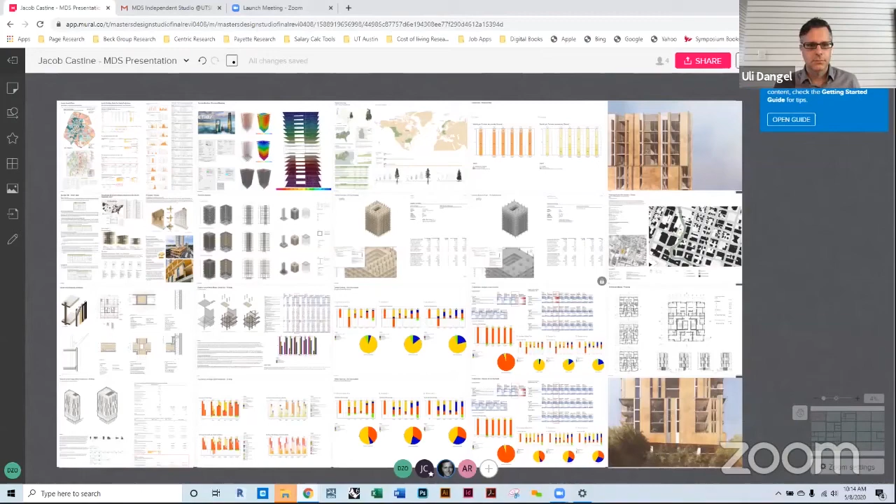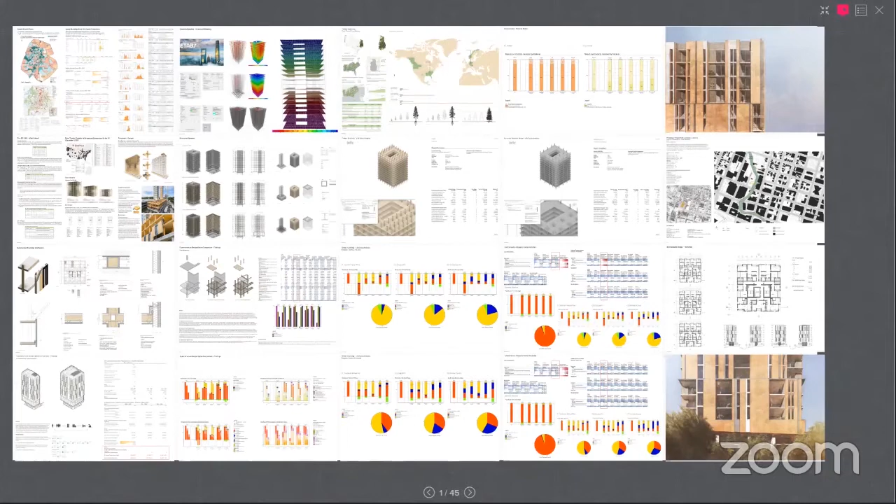I began to become interested in what are the potentials for this resource or this building system in the Southeast United States, obviously with southern yellow pine being abundant, with different physical qualities than other species of tree, but with a long history of light wood framing and other infrastructure uses in the United States. I decided to start to consider the possibilities for mass timber in Texas.

So I will start here. I began looking at Austin's growth plans, looking at population projections provided from the Austin Chamber of Commerce, using census data from the last decade, and then their projections through 2030, 2040, and 2050 for the city's growth.

It kind of goes without saying that Austin has urbanized quite rapidly in the last 20 years. So I started looking at Imagine Austin comprehensive planning for the city, starting to think about where are these nodes or centers that could start to produce more urban environments in the coming decades.

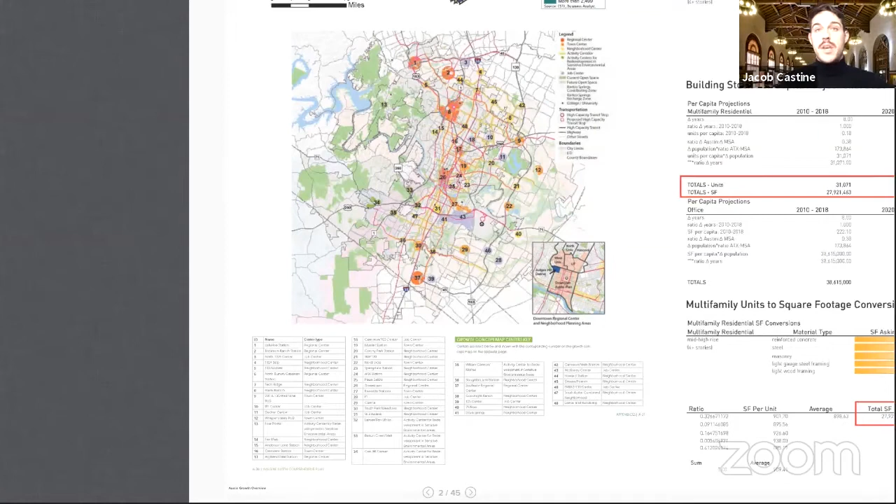Here is where I began with looking at these projections of population growth, and was able to get in touch with the right people at the McCombs School of Business here at UT to work through CoStar as a real estate development data source, and relate this trend over the last 10 years of population growth in Austin to some of its mid and high rise structures, breaking them down by building superstructure.

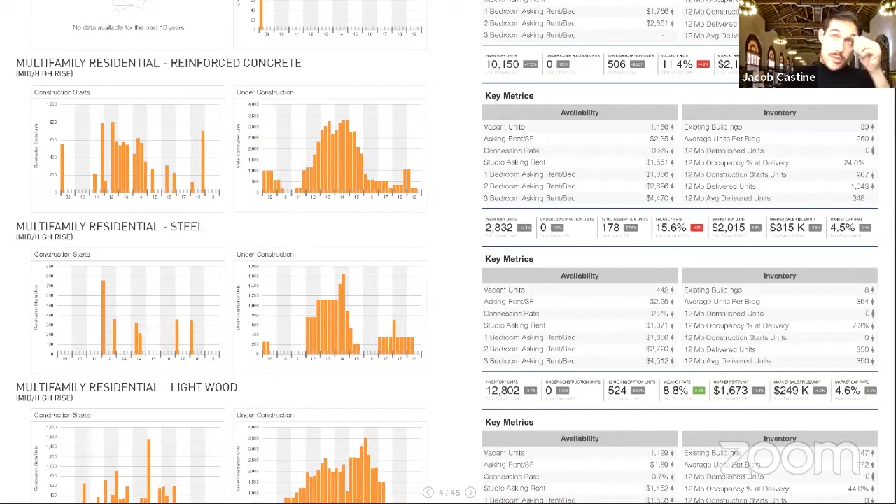So I was actually able to get a report. We were able to generate a report of inventory units for multifamily residential and square footage for office buildings being built over the same time period as the growth measured by the census data in Austin.

So what this started to set up was building stock per capita projections, not necessarily in a literal one-to-one ratio where everyone who moves to the city moves to a mid or high rise building to live or work, but to establish a relationship between the growth of the city overall and the growth of its corresponding mid and high rise architecture as well.

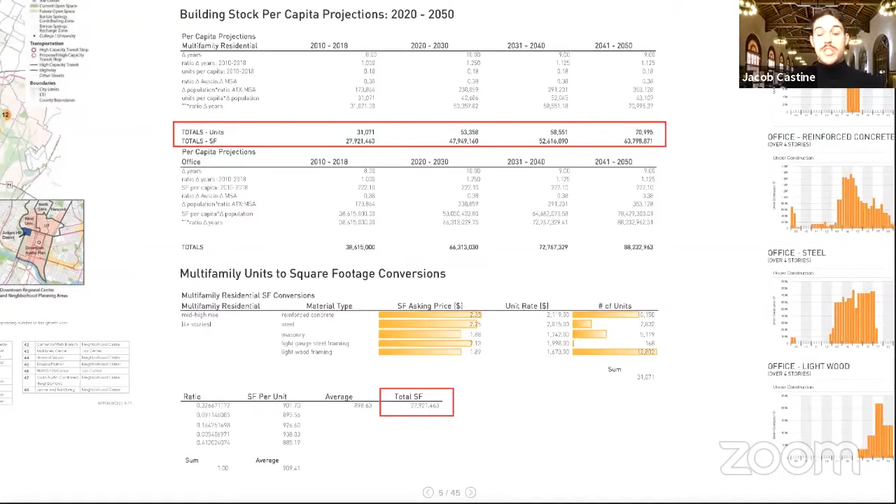So I decided from there to look at multifamily residential as a building typology and move forward with the research on that basis. From there, obviously the 2021 IBC is something a lot of people are very interested in right now, with some of their type 4 construction breaking down heavy timber into A, B, and C, and considering various heights that are new to the United States out of the material.

So from there, I started looking at precedents, and for me the overwhelming driving precedent for considering the potential to achieve competitive floor-to-floor heights and leasable square footage in a mass timber high-rise was something comparable to a reinforced concrete frame.

I started looking at the Brock Commons Tall Wood House at the University of British Columbia, their student housing building, which, for those who don't know, is the tallest mass timber building in North America.

I'll also relate this back to looking at the real estate metrics with CoStar—it was overwhelming that for multifamily residential high rises in Austin, reinforced concrete frames are what we've built with historically.

So that established a sort of baseline comparison in terms of looking forward to life cycle analysis and a competing market.

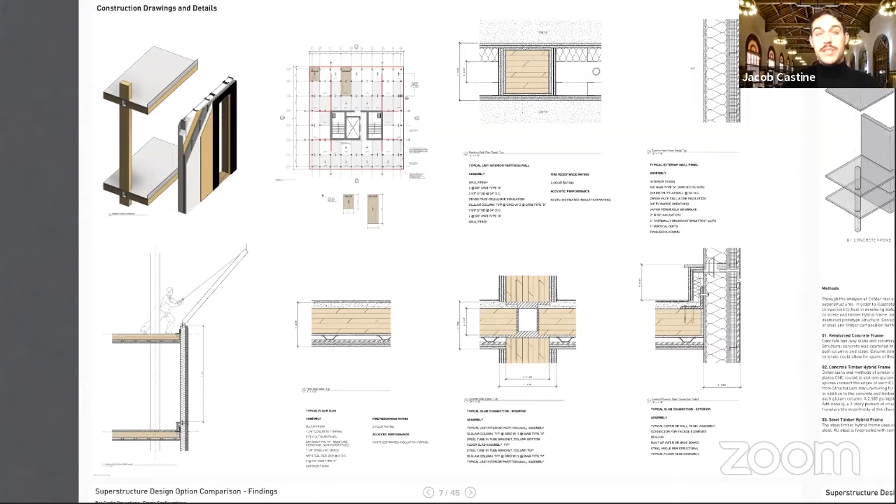So here I'll actually drive in for a minute and zoom in. I started with establishing what set itself up as a pretty efficient use—as best I could get efficient use—of the CLT bays for a prototype floor plate system out of the two-way flat plate slabs and the glulam.

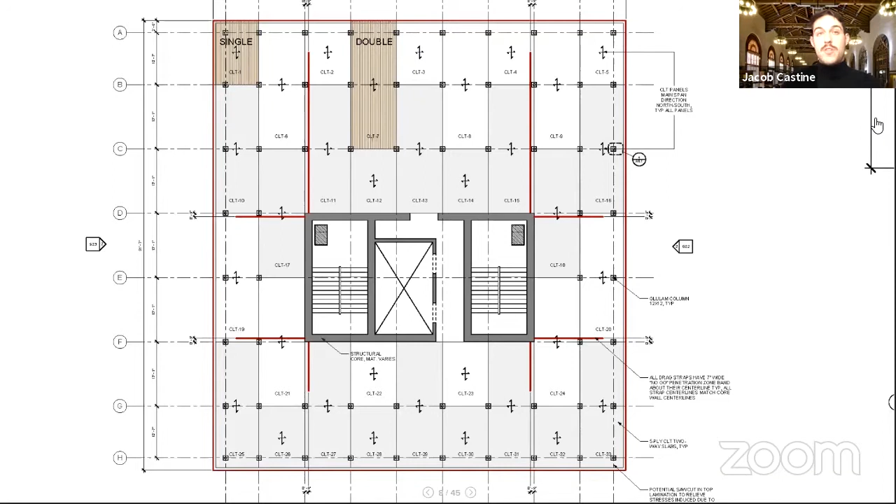So I started with this framing plan to work out a building mass using Structurlam as a resource to maximize the spans for the CLT. And then from here, considering the same or similar panel system as Brock Commons to clad the building overall.

And then these are just a few of those connections and some of the systems that started to set up what the prototype building could look like.

So in order to determine that, I was comparing this to a relatively, at least arguably close, concrete baseline model.

Uli actually was able to put me in touch with an engineer that had worked for Fast + Epp during Brock Commons, and since works for Intuitive Engineering in New York, a structural engineer who is professional with a history in both concrete and mass timber structures.

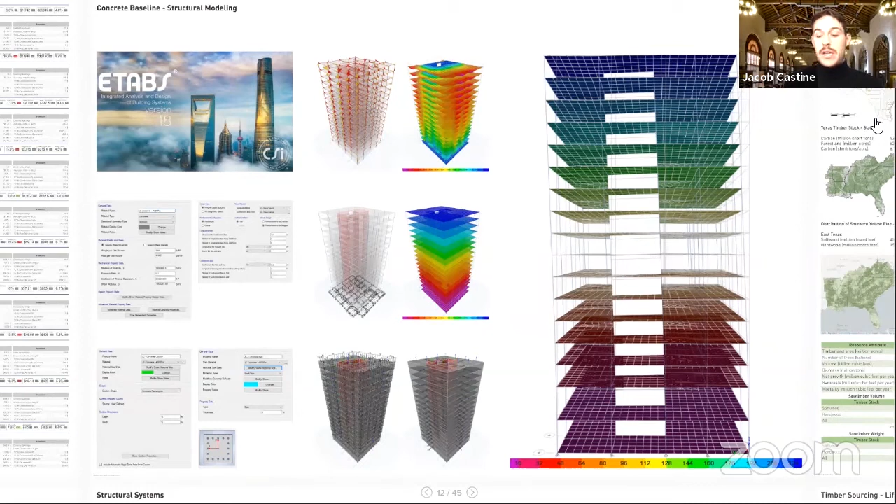So working with her as a consultant, and some professors from the School of Engineering, as well as another master's student consultant, I was able to work through an ETABS structural model defining what a relatively accurate quantity of concrete would be for a baseline prototype comparison.

This set up 3 design options for a frame prototype: one being the concrete frame, the next being a concrete timber hybrid frame, like we see with the Brock Commons Tallwood House, and a third option being a steel timber hybrid frame.

This third option came out of a discussion with Tanya Luthi, the engineer formerly from Fast + Epp and now at Intuitive. She mentioned that had the project timeline been something that could be accommodated a little better, through further testing, a steel timber hybrid frame could have been explored.

A steel timber hybrid frame, with steel as the core, the podium and the core, is something that could have been done at 18 stories. And she felt that, especially in this seismic zone, it was something that was achievable.

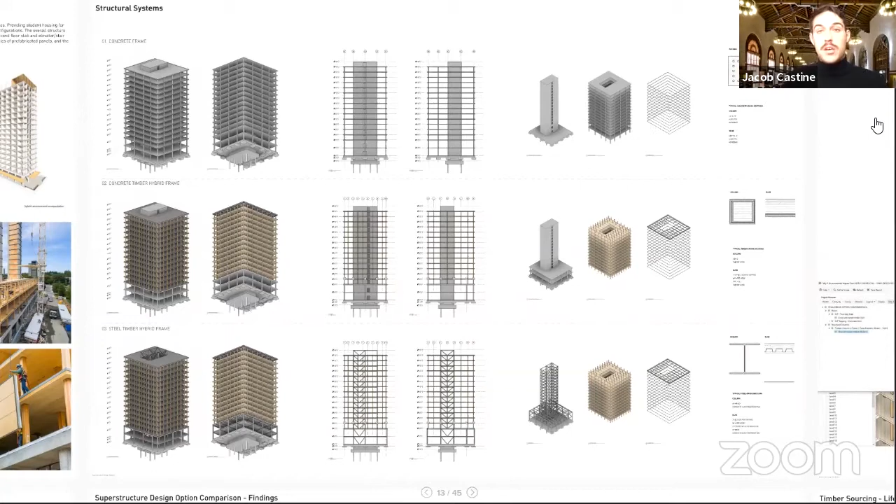So I thought that could be a really interesting third comparison. This setup, basically, we see down at the bottom of these models, you can see my mouse, taller floor to floor heights.

This established a sense of a podium for a prototype building, trying to be reasonable and accommodating something that could actually exist within an urban fabric and work with the streetscape, to have retail and a lobby and potentially amenities as a gasket deck, before then turning above to tighter floor to floor heights for the residential units.

I should note, for the life cycle analysis, there was no foundation assumed for any of this. Everything just started with columns at grade, working from there.

And then here I just have some general cross sections of some of what was tested both in ETABS and in the life cycle analysis. Here's just the timber concrete frame version of that.

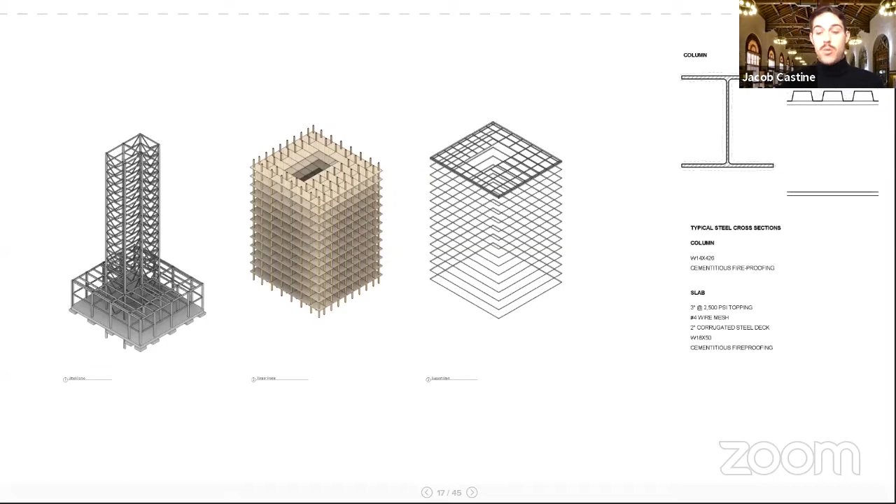3 layers of 5/8 gypsum wallboard and concrete topping were also accounted for in the life cycle analysis for both timber frames, and then the steel structure with cementitious fireproofing and corrugated decking for certain floors as well.

So these are just diagrams of what the three LCA models looked like. From there, I set up an analysis of the global warming potential for each of these systems. It was less about the actual numbers and more about establishing relationships.

I used KT Innovation's Tally, a software from Kieran Timberlake, and worked with their leading developer for the software at their office, as well as someone I was able to consult with from Lake|Flato Architects here in San Antonio, who use KT Innovation Tally as a Revit plugin for the Soto project, that mid-rise office project I mentioned earlier.

So really, for this, it was to establish these relationships between the three structures. A lot of things were considered, in terms of drag straps and channel steel to connect the CLT flat plate system back to the lateral core.

All of these things were taken into account when looking at the life cycle analysis and material comparison. I wanted to be as detailed as I could with the time that I had, to really work with a comparison I felt comfortable was somewhat of an accurate representation, and biogenic carbon for these studies was included.

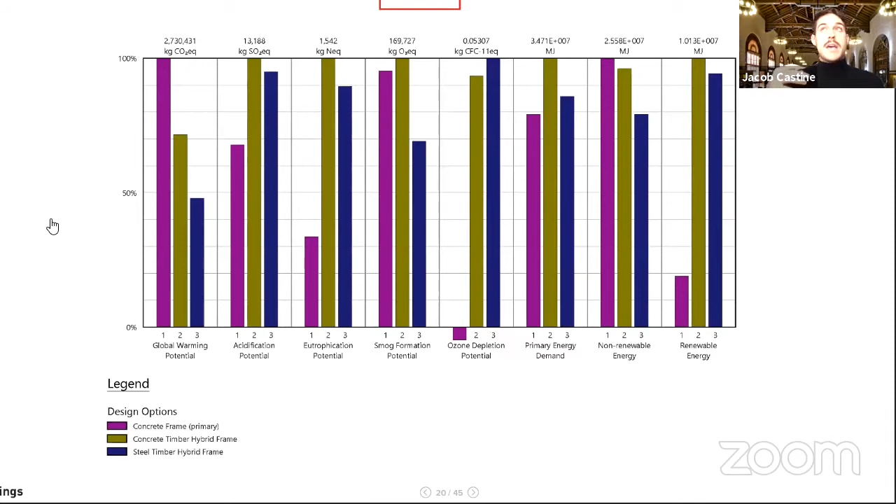So not just looking at the carbon sequestered in the frame, but using that as a gross to net reduction from the overall impact of the two timber frames, taking that sequestration number into account to look at what the final impacts were for each structure.

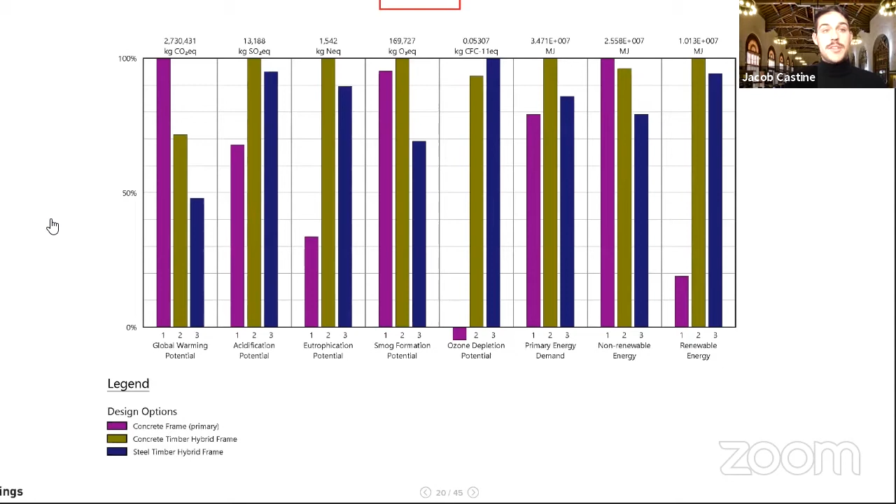So we can see essentially the concrete timber hybrid was about 75% impact, a little less than the pure concrete frame, and the steel timber hybrid was about 50% the impact.

So, these started to set up a bunch of other comparisons that I thought were pertinent to the study. Looking at all of these options, we see the product itself being an overwhelming number in the data, also end of life really driving some of these relationships. This is just a look at some of the material.

One of the things I actually learned from this that I thought was pretty interesting was just including the finish—the Type X gypsum for the two timber models—was actually a pretty significant amount of impact in the overall assessment, though still much better than the reinforced frame impact.

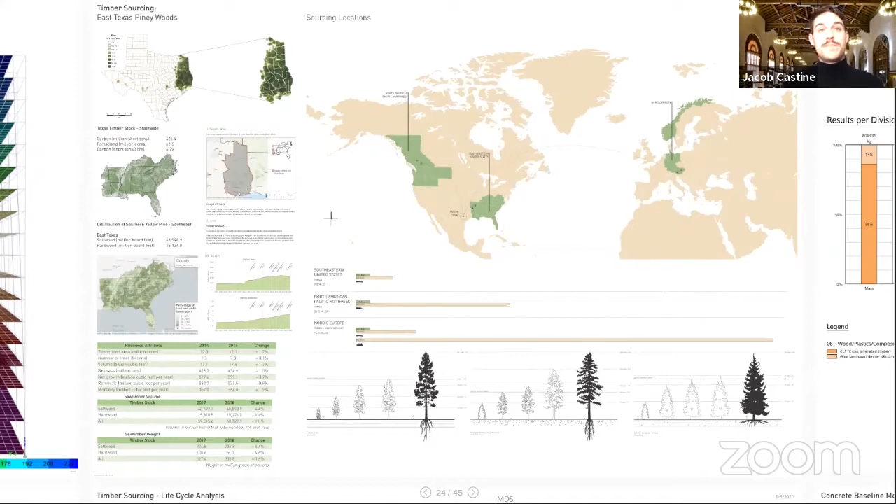So from here I started thinking about, if you were to use this material, how could you source it locally, or at least regionally, for the Southeastern US, versus considering the Pacific Northwest, or not as much of a relationship to North America with Nordic Europe. But looking at other countries starting to bring CLT into architecture and construction methods, sourcing from somewhere that includes container ship, etc., I thought could be an interesting layer to comparing sourcing options for the timber itself.

So down at the bottom of this screen right now, I've got the Southeastern United States versus the Northwest versus Nordic Europe. And I worked through some logistics tracking CLT, or all timber products, from Austria moving through Antwerp, Belgium as a port, and then container shipping to Texas City, just outside of Houston, and then bringing that to the site in Austin.

So that set up a mileage that's a little bit more involved than just these graphs, but these illustrate the overall miles traveled for the material and then for the product, for both trucking and container ship.

So I started thinking about how this could play into the East Texas piney woods and the resource that we have right here in the state. Obviously, at mass scale, this has mass implications as an introduction to Austin or to Texas urbanism in general.

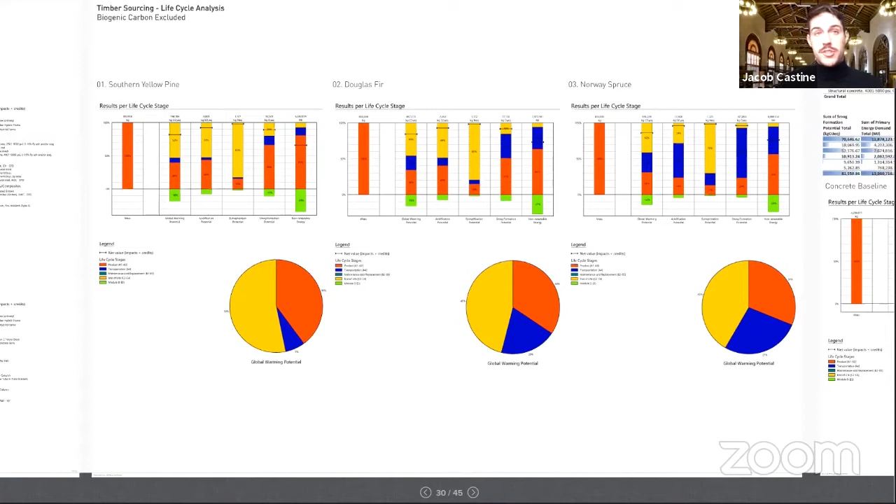So just starting to look and learn from some of these relationships. And now they're starting to bring into the conversation the use of, or the inclusion or exclusion of, biogenic carbon and how that changes some of the data.

So then this gets established against the concrete baseline, for the amount of concrete it would take to produce that same volume of building and same square footage. So everything kind of broke down to some later findings in including or excluding the biogenic carbon and relating that to the impact of the reinforced concrete frame.

You see here with southern yellow pine, I was actually netting negative on the sum of global warming potential total, versus barely netting positive for some of the other sourcing options, which was dramatically different than the reinforced concrete frame. But then excluding the biogenic carbon, I started to find numbers that were closer to half, or even greater, the impact of the reinforced concrete frame.

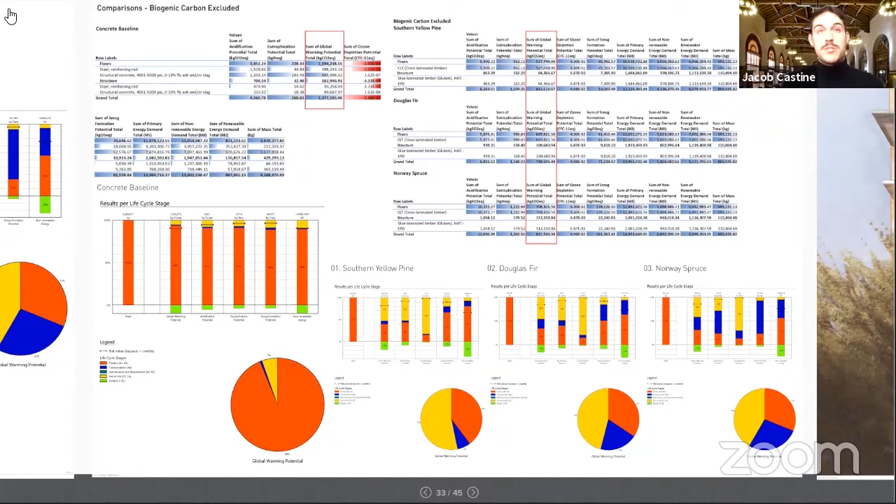So just a lot of discrepancies with that. So this turns into architecture at some point.

So I started working through some of the comments made by Tanya Luthi from Entuitive, about some of the difficulties they had working with this two-way flat plate system. Balconies are difficult, I could see why. Architectural form is difficult. You can kind of see that with the Brock Commons building.

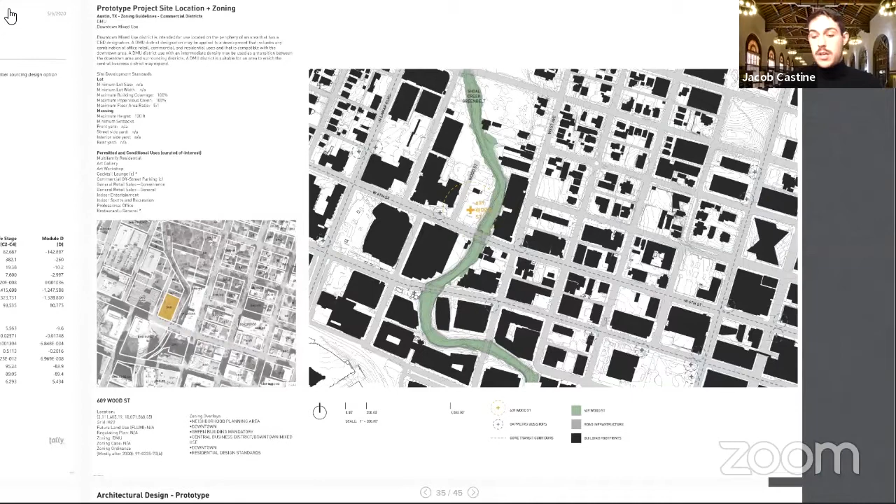It's very extruded, so I wanted to look at this in the context of downtown Austin and start to derive some architectural form that could hopefully produce some interesting architecture out of these systems, giving vibrant building design. This is an example layout of 7 units per floor plate of studio, 1 bedroom, and 2 bedroom capacity, breaking down the net to gross square footage. The efficiency of the floor plate is about 9/10, factoring in the core.

This starts to look at some overall massing for the building and its relation to the creek, and thinking about one specific design and how you could use these panel systems and the potential to inset some balconies, and try to accommodate the tight columns and establish a form that could hopefully be elegant and viable as an architectural solution to a downtown city skyline.

So for the sake of accentuating the podium, I sliced the massing down to the Shoal Creek Greenbelt that's found nearby, and similarly tipped the mass up top to allow for a nice overlook to the Capitol building and Judges Hill to the north, which is a very green, low part of the city. This rises the mass up on the south side of the building to cover chillers and rooftop equipment.

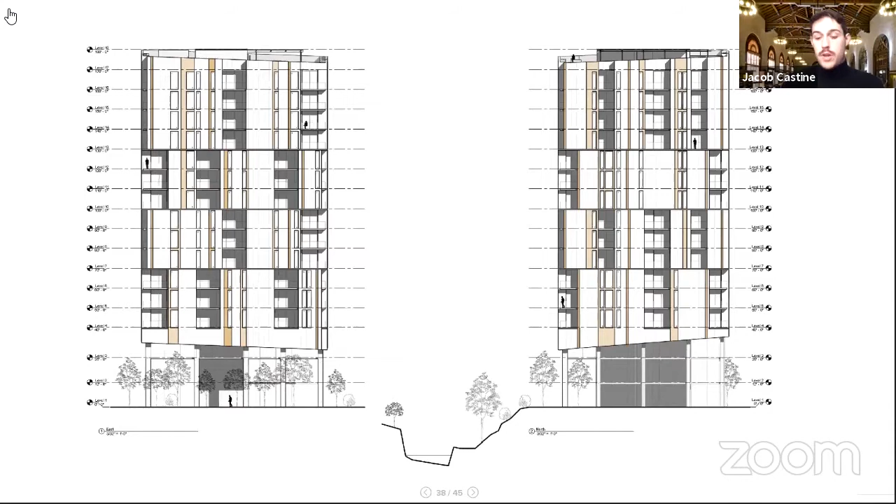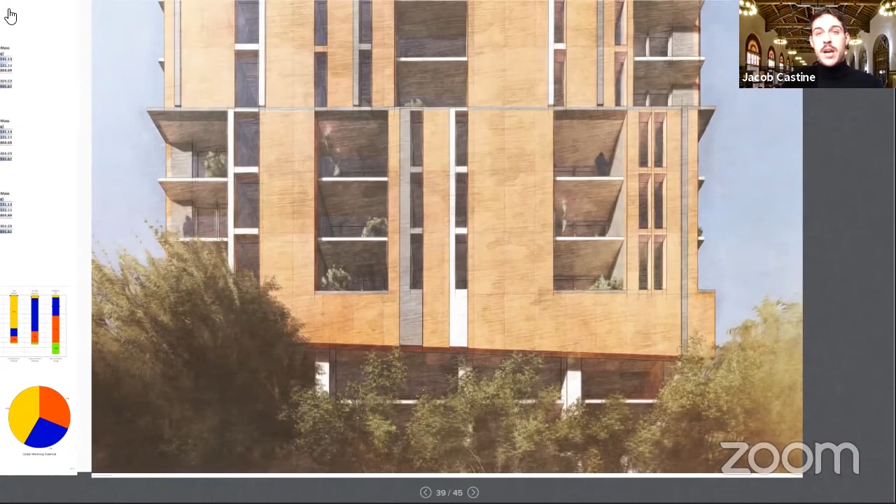So essentially you can work to create architecture out of a very rigid and simple system, to derive some form that could hopefully be more interesting and compelling in general for these projects. This is just a view looking back from that Shoal Creek Greenbelt.

So from here, some of the conclusions, at least so far with the research, fall similarly to a lot of the discussion that Alan and Andrew have in this timber topic for the industry right now. Looking at different modules, different design potentials for the building and how they affect metrics, I thought could be kind of a nice conclusion, at least so far. And I say so far because I'm still very interested in all of this, obviously.

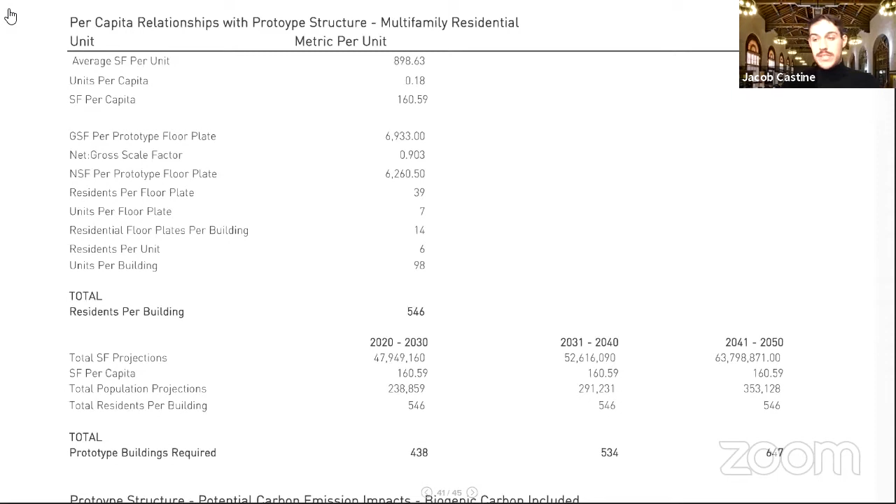Just to wrap up some of the study and look at relating the life cycle analysis metrics that I got through Tally back to the per capita relationships of the real estate data and the Austin population. So essentially some of the findings were that the steel timber hybrid frame performed about twice as efficiently in terms of global warming potential as the reinforced concrete frame, with the concrete timber falling somewhere between the two as an intermediate.

You start to see not the relationship of the sequestered carbon, but that being factored into a relationship of per capita projections in terms of multifamily square footage per person as the city grows, and how that works into tons of CO2 folding into the coming decades over time, and what the potential reduction implications could be, at least at full acceptance of the material. So 100% usage is as far as I was able to get with some of these comparisons.

So you end up with as much as 2.5 million tons of CO2 over the next few decades when looking at a steel timber hybrid frame versus some of these reinforced concrete frames. And then this just had some fun with thinking about what the actual implications of this are in terms of how many vehicles that's taken off the road annually, and some of these other relationships.

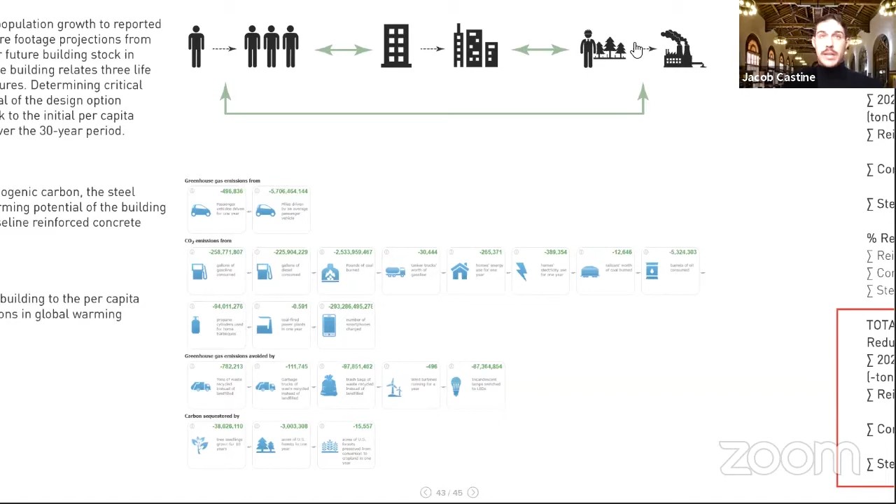This diagram at the top just illustrates the workflow of the project. As the population increases, it creates relationships to how building stock increases in terms of square footage, creating relationships to the materials we use to derive those buildings. And relating those buildings back to the population brings a full circle look at what these implications are, and what you get with some different options and different residential units packed into different massing.

As much as 1,000 to 1,500 tons of CO2 reduced per building.

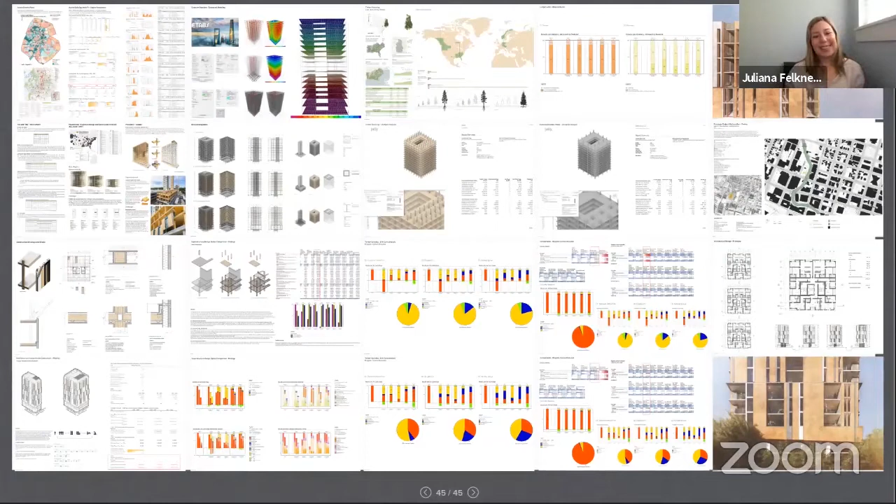Is there a way to let other people drive on the screen share or anything? Like if anyone wants to point, or I can tab through as necessary, just let me know. I don't know if they are—I think they're able to move it within their own mural, but yeah. Yeah, it doesn't seem like we can annotate. That's been something we've been able to do in the past, but I'm not seeing that well often. I did not set up this meeting, and probably that function was disabled. I can wave my hands a lot.

Okay, well, I'll jump in. First of all, Jacob, this is incredible work. It's deep, it's broad, it's nearly comprehensive. I have a couple of questions about it, choices you made methodologically.

But I just want to open by saying that this is the kind of work that architects, engineers, builders, the building sector in general should be doing—to evaluate their consumption habits, and also to feed back information, as Juliana said, back to behavior, right? Like how much consumption we as consumers, dwellers, are responsible for, and also the associated impacts of the building life cycle. So any comment I have from here on in that's a question or maybe a criticism is couched from a position of me being completely impressed by the work. I just want to make that clear from the outset.

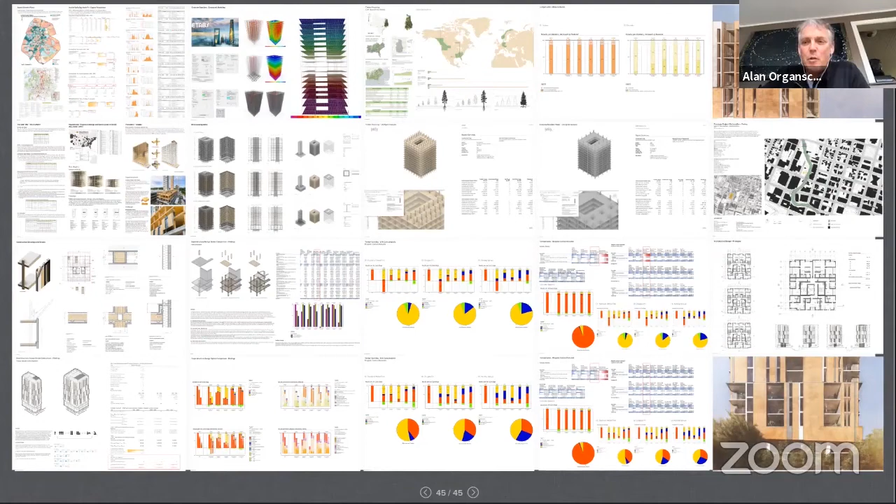Could you, or maybe working with Diego, be the people who really start criticizing this? I thought one of the most poignant things you pointed out was gypsum board, which has a huge carbon footprint and huge set of impacts. No one knows where the gypsum mines are, where this stuff is mined. We're completely disembodied, and even the code at 18 stories still requires coating our buildings with that stuff. You showed that impact, and I think that's really valuable. So what would be the substitution benefit in shifting to some kind of bio-based panel, of which there are many? They don't yet provide the fire protection, I admit that, so I understand the feasibility concern.

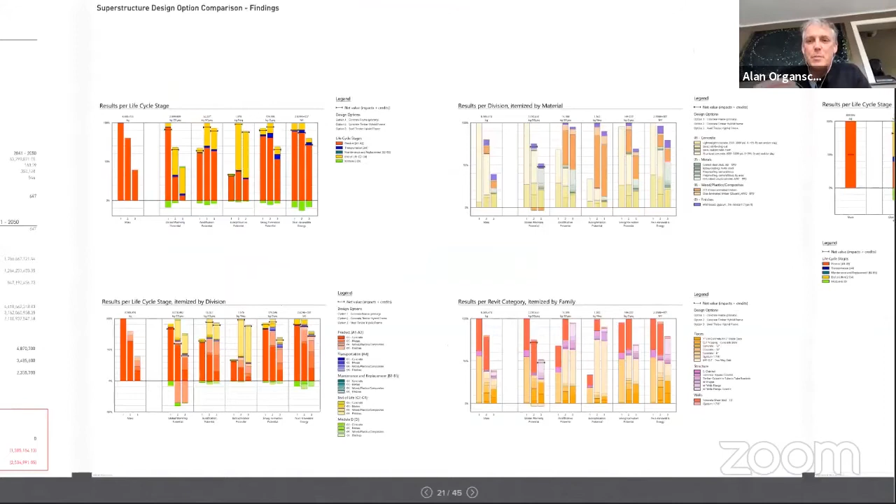But I guess for me, the thesis is something that not only does really hard, close research into existing conditions, but also proffers technical as well as design futures. I think what's implicit in the amazing work you've done - and I don't use these adjectives lightly, because I'm really impressed and look forward to poring over it in more detail - is that given the incredibly narrow window for climate action, and given the enormous share of responsibility we hold in the building sector for anthropogenic greenhouse gas emissions, this is something where we've got to move the ball forward fast. That's a generalized comment, and I should shut up.

But I think one more comparison would show us something radically different, and that might incentivize policy, development strategy, any number of wedges in the climate action field that could really start to move the dial.

Yeah, those are great comments, I really appreciate that. Just to speak quickly on that, without taking time from anyone else - my feeling is it's very well received, in that it's not a hindsight's 20/20 thing, but more of a 'where can I go from here' with some of the findings already. Thank you.

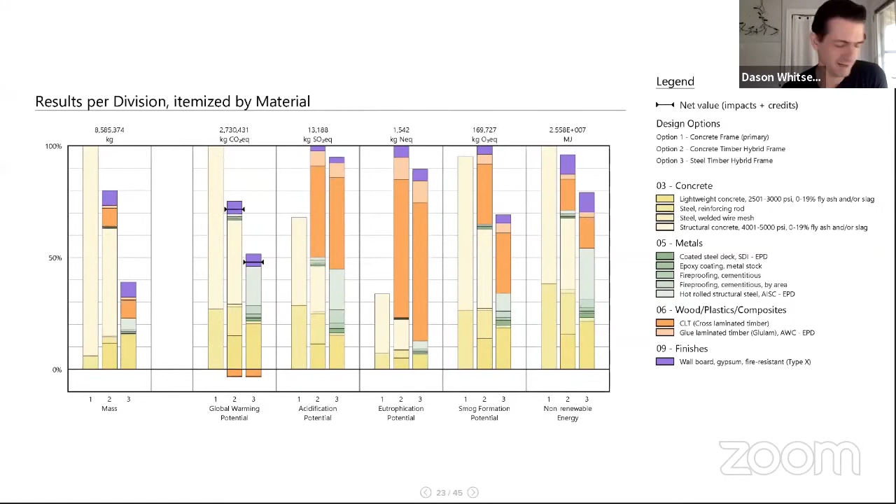Yeah, I've got a few comments as well. I would second everything Alan said about how fantastic your work is here, and really appreciate the depth of analysis and also the design sensibility applied to it, looking realistically at various construction implications and detailing. So it's all very impressive.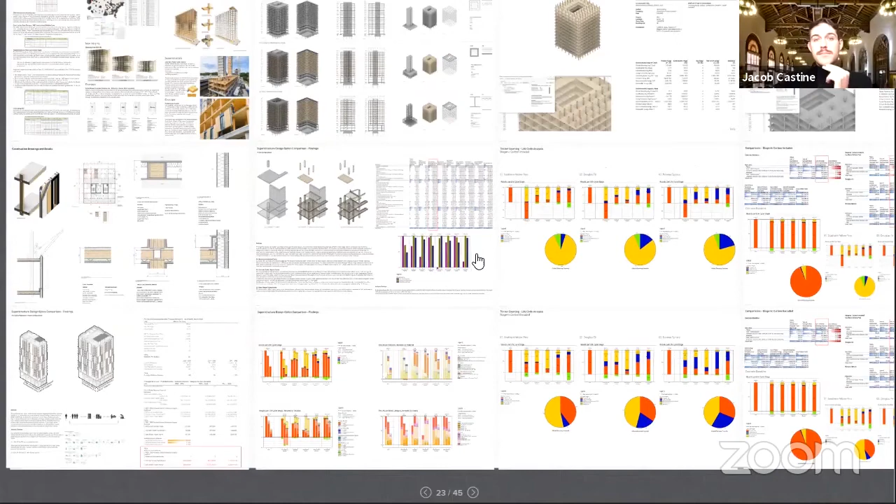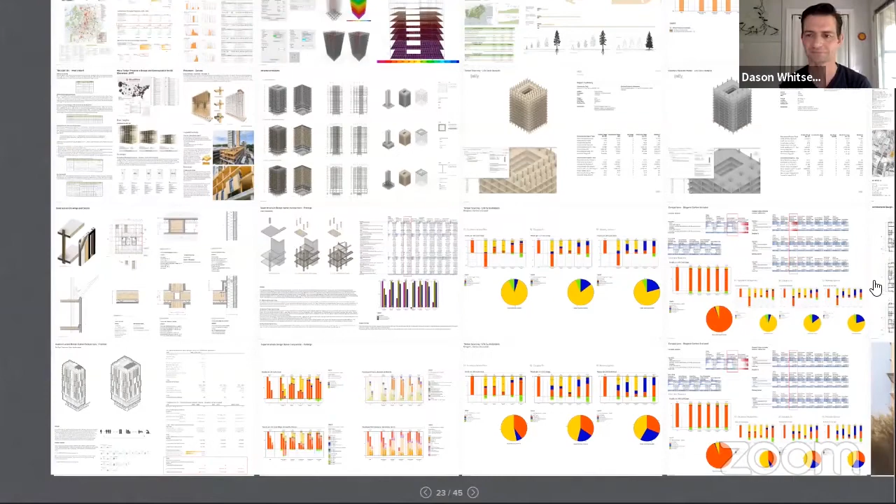I've got one minor technical question and then a broader one. My minor question: you mentioned briefly that the lowest carbon system was actually negative in its global warming potential, I believe under the Southern Yellow Pine scenario. Can you explain why that is, what was leading to it being negative? I think it's over there on the middle right of the view we're seeing right now, where there's some red in a rectangle. Yeah, here it is.

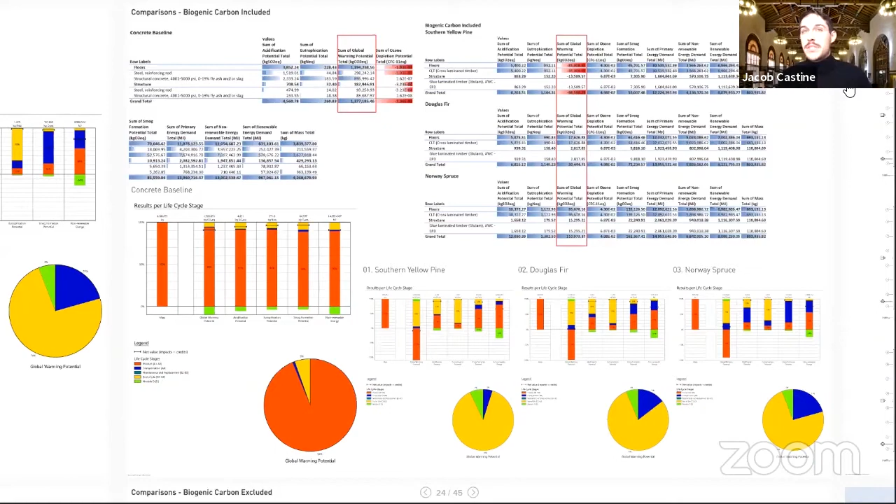Essentially, what is driving that number with biogenic carbon included to be negative is that the amount of carbon sequestered in the mass of the timber, and it being sourced so locally that transportation isn't overwhelmingly consuming the offset of the resource. It's holding more CO2 than the system - at least the tally is saying that option is sequestering more tons of CO2 than it is emitting through making the material.

Got it, okay, that makes sense. And that's just for the timber? Yeah, that makes sense. One general comment is, I think you didn't consider operational energy, am I correct about that? No, I did not, that's excluded from the study. Because doing the superstructure, the frames, I didn't have a full building I was looking at.

Sure, and the breadth of what you did look at is quite impressive, so I don't consider that a fault of your study. But if you expanded the system boundary to include operational energy, you'd probably see an additional improvement in terms of the carbon footprint - probably small given the size of the buildings, but a comparative envelope built out of CLT versus a concrete panel system or metal stud system for the walls would probably perform a bit better, although that's probably not the majority of the energy load. So that's another little tick in favor of this.

I guess my broad question is - I'm sorry, I have a question, sorry, this is Ray Zaferon from Civil Engineering. Are you stating that the mass timber building would have better performance in terms of energy efficiency during the use stage? Could you elaborate on that? Because from a civil engineering structure standpoint, when designing buildings such as masonry and concrete, the fact that these are heavy mass buildings means you tend to have less HVAC requirements, because you're able to use the thermal mass of the building to offset some of the energy.

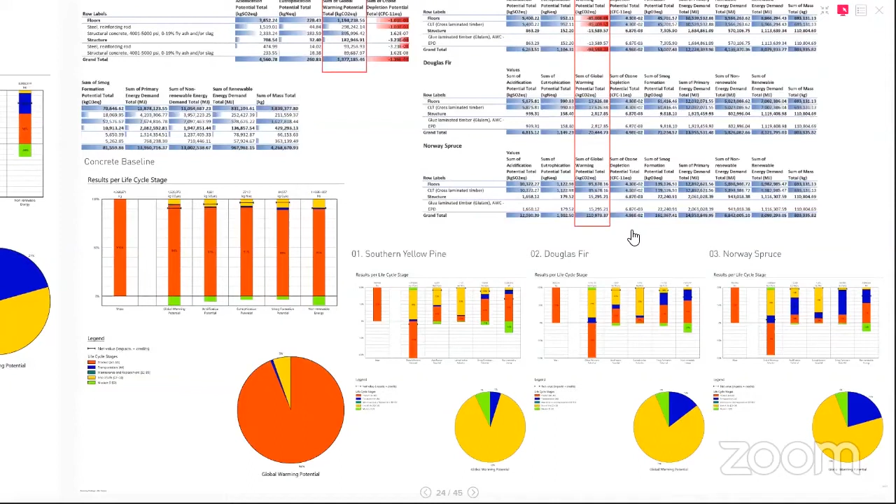I think that would be interesting to compare. In calculations, you can simply try to figure that out. But I also think there may be thermal bridges that come about from that cladding system, so more needs to be explored there.

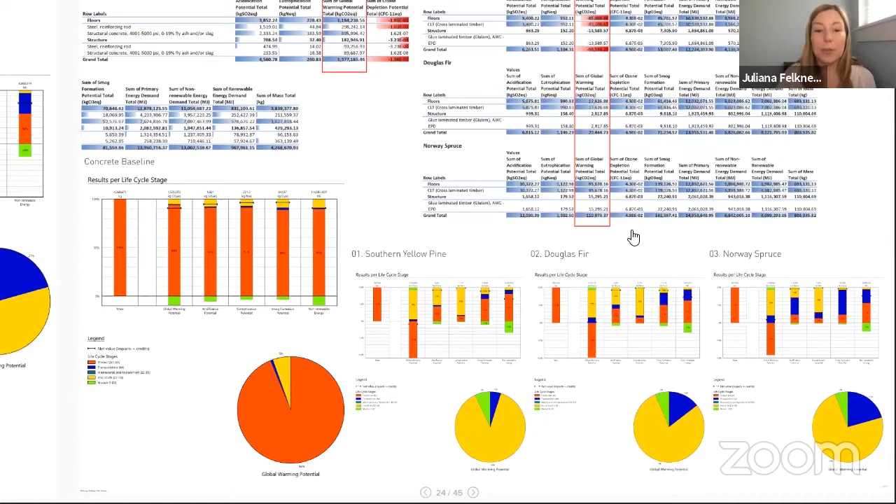Sure, yeah, absolutely. Jacob was very modest when he said he did not consider operational energy. While he didn't calculate it, he did consider it qualitatively in the design of his window wall ratio. For example, you can see he has very small windows in some of his units, and that was deliberate to reduce the solar heat gain because we are a cooling load dominated climate with hot summers and need for air conditioning most of the year. He also gave very generous balcony spaces to give a kind of buffer zone for each unit. So while he didn't calculate those geometric changes, I do think they help pull this material to its fullest potential.

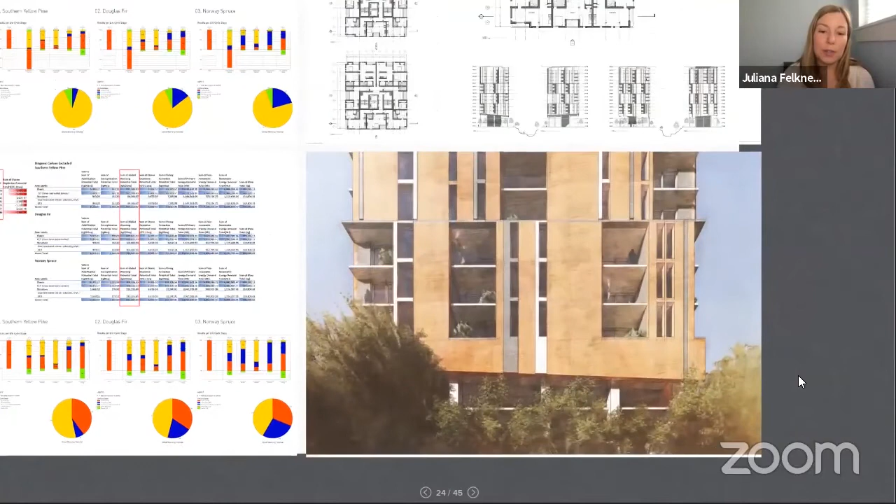Thank you, Juliana. I appreciate that point, because what I meant is that it was excluded from the quantitative studies we're talking about, and it was assumed that the superstructure of the building would be clad or finished in a similar system, regardless of what the frame itself was. So kind of excluding all of that from the life cycle analysis itself. But those things are taken into account when you start to look at the architecture, with the deep inset balconies and window to wall ratios on different faces, responding to the climate in that sense.

Yeah, and since Dason you raised the sort of life cycle issue of it, we should also be looking at the end of life scenarios as well. End of life scenarios for the steel and concrete system are not particularly good in terms of overall impact, whereas wood is generally much more reusable as a system, with much fewer post end-of-life processing requirements for reuse. Whereas obviously recycling steel has huge impacts, and we're still trying to figure out what to do with concrete rubble around reinforced steel reinforcing.

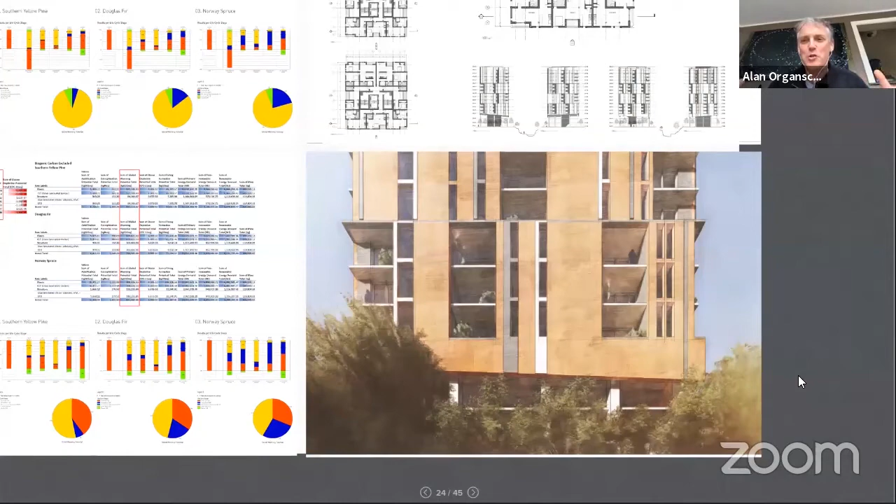So I think, with our systems thinking hat on, the further we look at the true flows of material, carbon, and energy through the building life cycle, and include repeated life cycles as part of a kind of circular economic position, I think you're going to find that operational side is obviously critical - and it's really good that we spent so much time trying to refine that - but we really have to start looking at that much broader system to get the real impacts down.

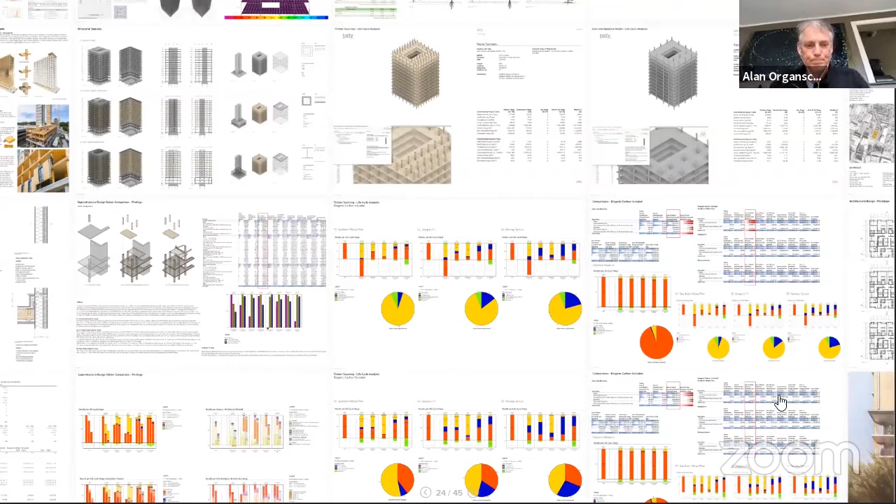Yeah, I think that's a great point. And to extend that a little bit, my broader question - and I don't have an axe to grind here, I don't have a preconception about what the right answer is - but a question I've been mulling on for a while without really having studied it: there have been some pretty convincing arguments made that, in spite of all the benefits you've demonstrated here and that we've discussed with mass timber, the trees are actually more valuable in the ground, and we'd be better off leaving our forests with more mature trees intact rather than cutting them to build out of mass timber. I'm wondering if you have a rejoinder or a perspective on that argument.

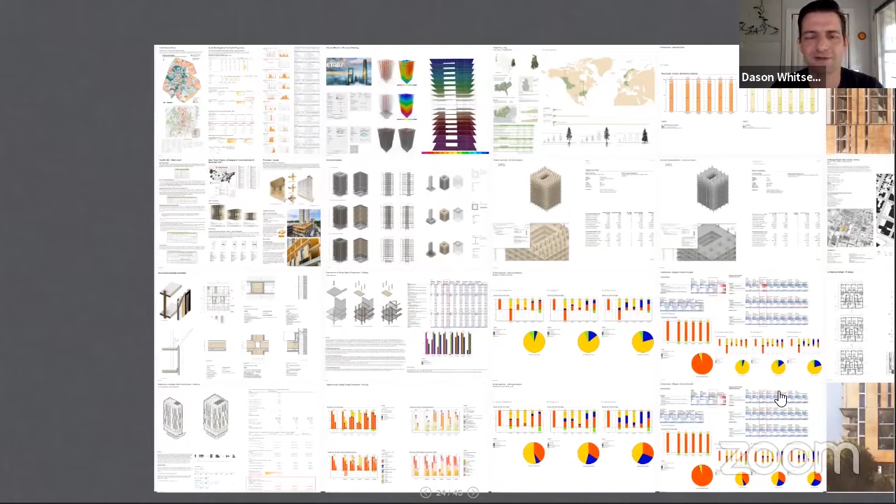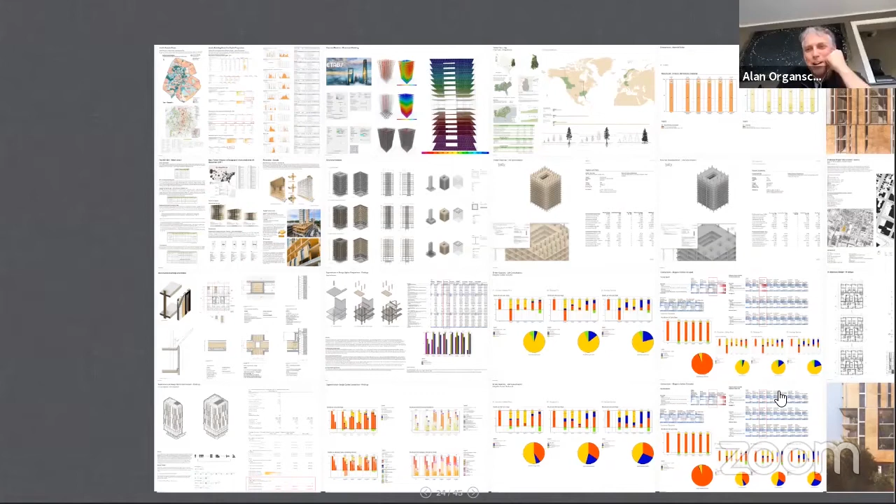I'll open this one up to the room. I do not. I'm going to let Andy take it. Yeah, this is a topic that's... well.

First of all, just to echo what's been said, Alan and I have been doing this work for a long time, and it's really rare to see professionals, much less students, who are so conscientious, deliberate, and thoughtful in preparing such a wide-ranging study. So really, a huge kudos to you.

Not only for preparing the study, but for building a network of collaborators who are able to reinforce the utility of this to expand beyond just fulfilling a master's thesis. I think what you produced here has some durability that can carry you really quite far in this field.

So to briefly touch on the topic of the best and highest use for forest, if we're talking about the U.S., what we have is a systemic issue of undermanaged forests, and that's true in the Northeast. It's true to an extent in the Southeast, and the Southeast's critical problem is that 20, 30 years ago, there was a huge stockpiling of planting of softwood lumber in anticipation of this never-ceasing building boom, which 2008 really threw a wrench in.

So what we actually have in the Southeast is a huge market surplus for softwood lumber, Southern yellow pine in particular. There are a number of people working on this, much more qualified than myself or Alan, for whom this is a real economic issue—owners of timberland, timber managers, REITs, TIMOs—this whole financial ecosystem that relies on essentially returns for the planting.

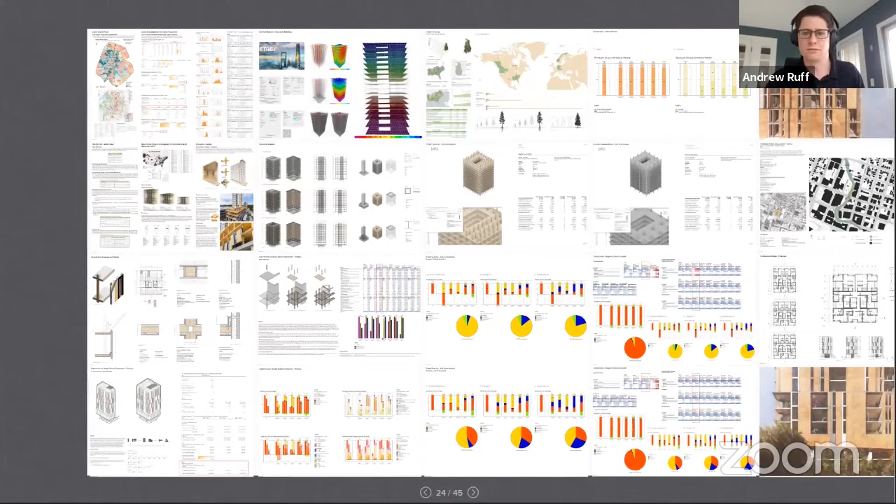But I would like to speak to Dason's question about relative strategies, best practices for carbon forests and buildings, because we are talking about a potentially synergistic relationship between the forest biome and the urban environment. So I would say that what you've raised is a question that's really being debated pretty hotly within the environmental community. I would say it's less debated hotly within the forest science community.

The forest scientists we're talking to in different regions are seeing forests as ever-weakening carbon sinks, not just because they're retracting due to suburban expansion or agricultural land conversions, but also because they're weakening due to climate change and mismanagement. In fact, the climax state we thought existed in forests 50 years ago, there is no such thing.

Forests are disturbed, and what regenerative practices do is try to take advantage of those natural disturbances that produced succession growth in forests, that produce other habitat, that promote carbon and photosynthetic carbon uptake. We can actually manage forests in ways that would produce really good material for building, and potentially incentivize forest expansion, afforestation, reforestation, and restoration.

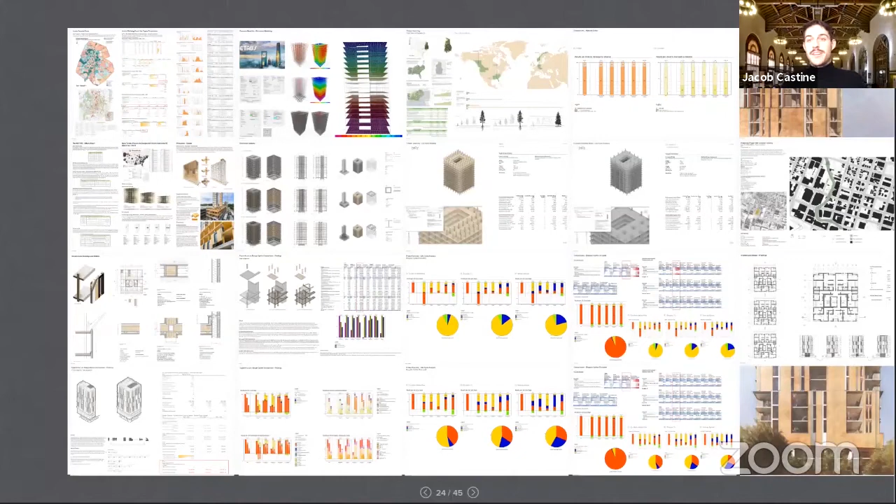Thank you, I really appreciate everyone's comments. This is obviously something that doesn't end here. It's a very big interest and a passionate endeavor to move forward with. We've talked about a lot of really important facets that I need to learn more about myself, and try to see how I can contribute or at least learn from the conversations. I start next month with a firm in the commercial high-rise studio market here in Austin, and hopefully with this firm and beyond in my career, I hope to make an impact with tall buildings. So thank you.

Wild guess, is it Paige or? Yeah, okay. Thank you, Jacob. Thank you to all our reviewers. Thank you very much. All right, and with that, I'm going to turn it over to Diego.

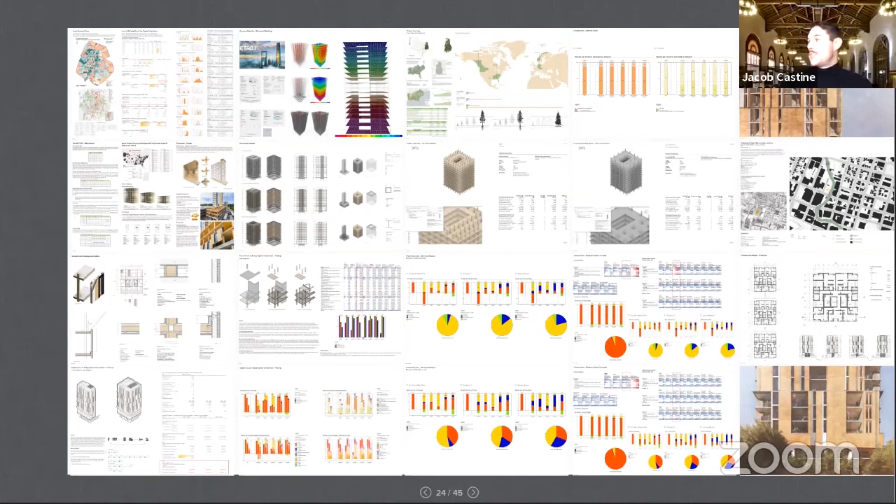Juliana and Uli, that's really impressive work. Thanks for having us, it's really all that Jacob's doing, we just kind of pointed him in the right direction and connected him with some people. Great, and I'm glad that those collaborations were fruitful, Jacob.

Someone's washing their hands. Hopefully they're not on the toilet.

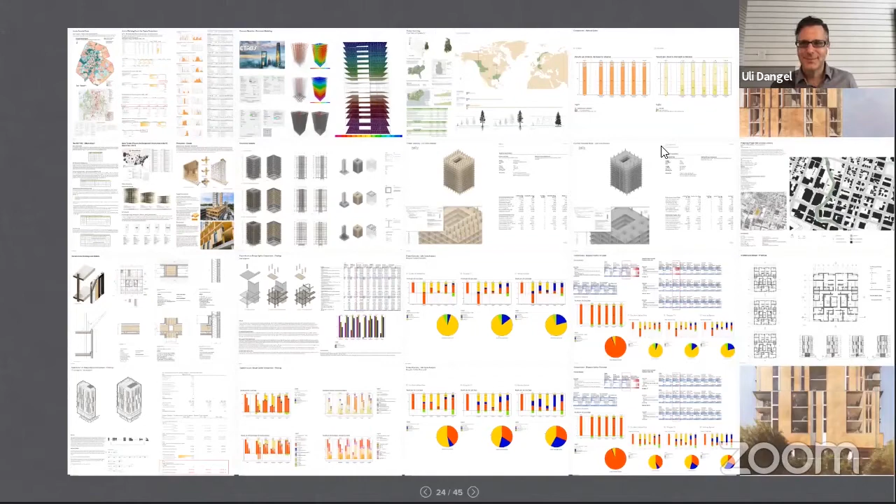Hi everybody, how's it going? Good morning, still morning, thank you so much for joining us. Well, here in this time zone. Oh right, on the East Coast it's already... Alan and Andrew are wondering when they're going to get lunch. I wish we could provide that. You certainly would, I think we'll get together afterwards too, right? Current situation is that we get this wonderful panel of reviewers that normally definitely wouldn't be able to fly out to Austin to give us their comments. So just in the spirit of making the best of the situation, we're happy about that. So I'm just pulling up my boards here and get started in a minute.

So many emails to send, see. Okay, here we go. Okay.

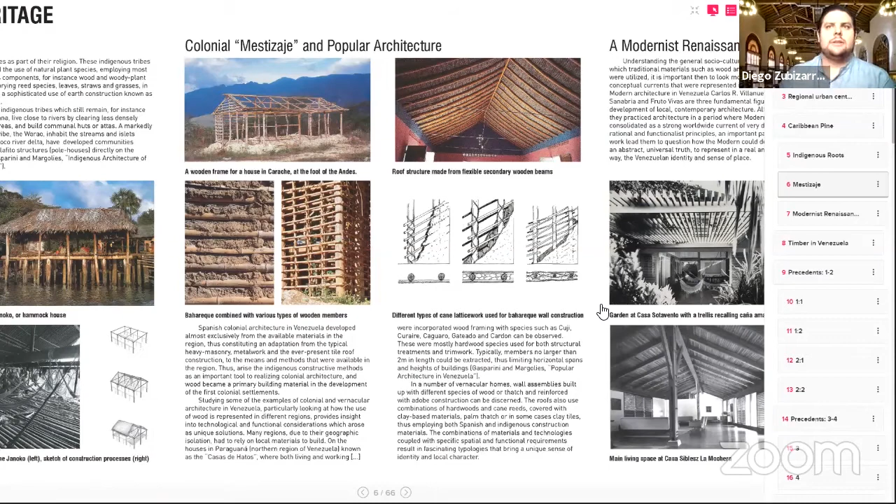Then just looking at the history of Venezuela, obviously a big thing is the merging of colonial Spanish culture, which in a larger scope has a lot to do with how the material culture of building has been largely replaced with a northern or colonial way of building, and wood construction has been largely abandoned. But understanding how some of that merging of vernacular construction techniques with Spanish and European building methods arose and created these really interesting ways of building with cane, reed, and mud, using these hybrid systems to build. Then finally, looking at some of the modern architects, who you could refer to as critical regionalists, and some of the recent ventures of modern architecture in Venezuela trying to bring back those tectonic and material expressions in the work.

So the work of three architects I looked closely at during the research semester.

Another part of the research has been understanding that the notion of building with wood hasn't really caught on in a lot of areas in Latin America. But there has been an effort in Venezuela to develop an interest in this, particularly through an organization that still exists but isn't as active as it used to be, the National Wood Products Laboratory, based in the western Andes region of the country. They were building incredible glulam structures for their facilities 40 years ago.

In my research I came across things like they had consulted with structural engineers from Portland, Oregon to design these glulam beams. So recognizing that value and that interest, and looking at a lot of the research and papers that forestry scientists and architects have written in relation to the material, which although hasn't really caught on as a constructive system, because the building market is dominated by traditional carbon intensive building materials, is there.

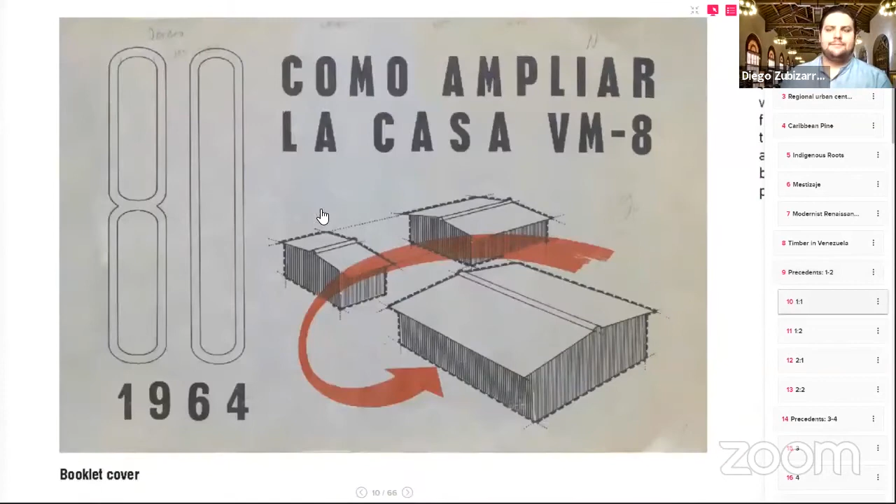So building on that, finally in terms of research and precedent work, UT is famed for having these amazing libraries, and I really took advantage of that. I went to the Benson Latin American Library and found this 'build your own house' manuscript from 1964 from Venezuela, which I thought was amazing. These are some shots of it, basically this manual produced by the Workers Bank of Venezuela for working families as a guidebook on how you could expand your home or remodel it, with these didactic, instructive visuals.

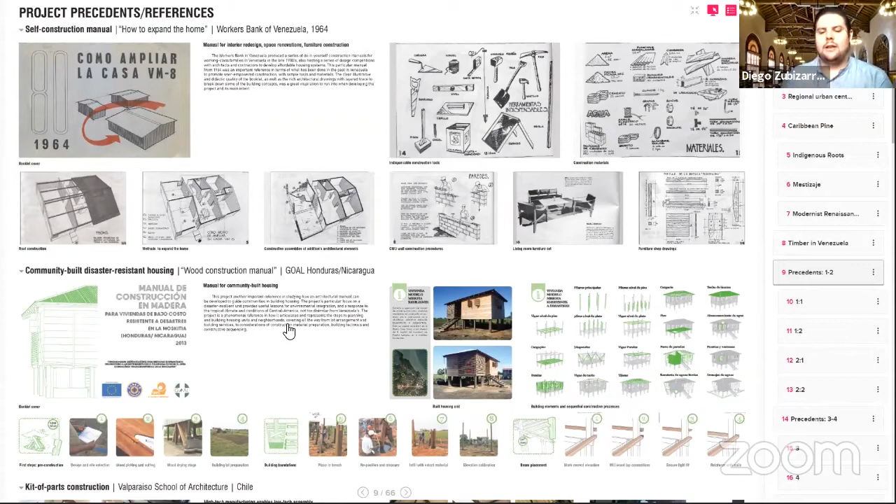So I thought that was really compelling from the standpoint of the project contemplating the idea of user empowerment, designing a system that can have input from the user as a way to leverage labor over construction costs and things like that.

And this is another project based in Nicaragua, which looked at disaster resilient housing. Again, the graphic quality of how this idea of community building and people actually following this guidebook, being able to build with local materials for their needs, was really compelling.

And then finally some ideas at a smaller scale. This university in Valparaiso School of Architecture in Chile has been looking at, which isn't unheard of, but the idea of simple mortise and tenon joinery, utilizing pre-manufacturing and milling with robotic capacity to facilitate assembly on site, or the use of this kit of parts architecture, which is more high tech and pre-manufactured, making it very easy to assemble.

And lastly, just speaking to this model, we've all heard of Aravena's half house model, the idea of providing an infrastructure that can be infilled or built upon. In a way of contrasting or comparing, this is a shot from the David Tower in Caracas, Venezuela, basically an enormous high-rise office tower that was squatted and inhabited. From the outset of the project, recognizing that there's a certain kind of beauty or value to this resilience of the user infilling the frame.

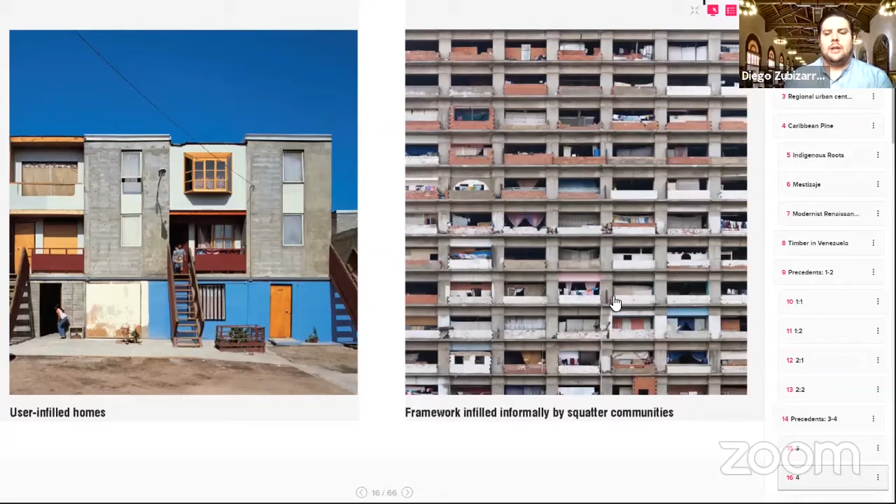So jumping onto the site, this is an urban map of Ciudad Guayana, not a great one. It's been really hard to find GIS information, so I had to rely on some probably year 2000 CAD plans. If I zoom into this plan, you can see how outside of the digital line work here, the city has continued sprawling outwards, and I'll get into that a little bit. But basically, Ciudad Guayana stands on this really critical point where the Orinoco River meets the Caroni. It's a really resource-rich region.

The city was actually developed as a growth pole. It's a really young city, planned in the early 1900s, or really mid 1900s, with the consultation of the MIT Department of Urban Planning, actually.

It was just this idea of basically a Brasilia focused on the mineral extractive processes that the region could hold, mainly in iron ore and aluminum, and also an enormous hydroelectric potential upriver on the Caroni. So the idea of this city is this planned growth pole, which is really controversial in a sense, and a reason I thought would be really interesting to look at.

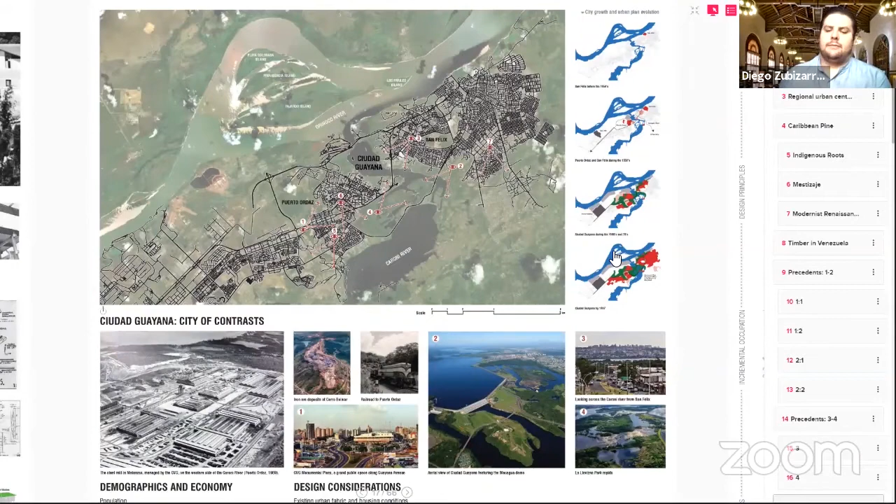Going a little into the demographics and research I did, and what would guide the design considerations. I'm not going to go over all of these, but basically looked at a few reports describing the socioeconomic metrics, and identified the larger, surprisingly large socioeconomic groups that exist are between lower, middle, and lower class - over 70% of the population.

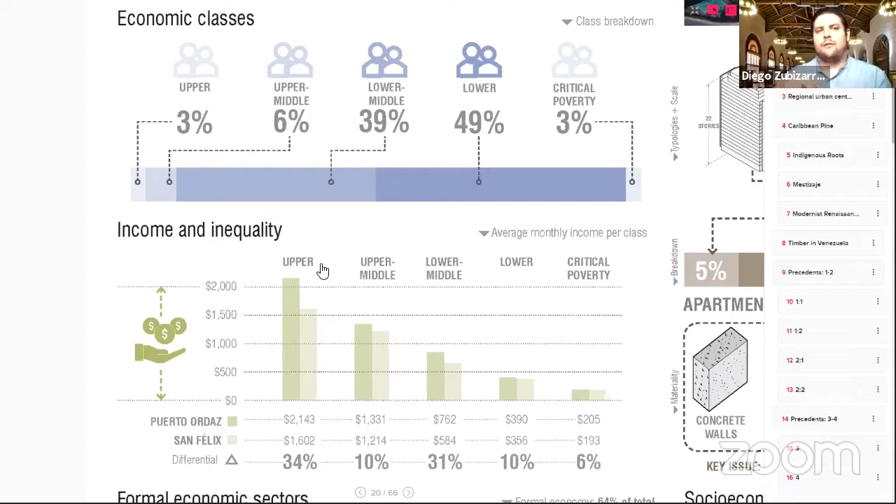And just always really noticing this large divide between the two parts of the city. Puerto Ordaz and San Felix are the two, the original town and the industrial town west of the river, that could really conform the whole city, but these very large divides in terms of the socioeconomics.

I've actually never visited the city. I didn't have the opportunity to go and travel there for several reasons, but in a sense, the project looks at the fabric of the city in a somewhat removed way, through these demographic indicators and reports.

Just able to look at a little bit of the built fabric of the city, and understanding that a large percentage of the housing is focused on lower density living. So anywhere from row house typologies to single family, and these more informal dwellings that are very typical in Venezuelan cities, and a lot less of these more high-rise, mid-rise scale projects.

This is a little more qualitative than quantitative, but understanding that the building culture is very focused on concrete and steel as primary materials. So understanding that within the current carbon crisis context, as a way to leverage the potential of wood to combat this very carbon intensive way of building, and also it serves as a response to the growing needs of the urban population in terms of housing.

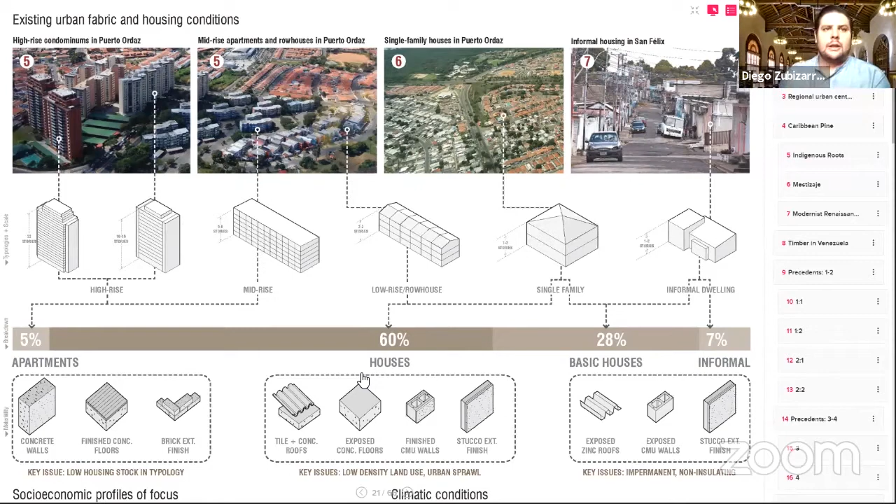So basically for the project, I just tried to focus on these lower class social groups in terms of economic resources. And these are just two profiles based on surveys that I put together, just in terms of thinking of the ideal client - not to say that I really looked at the metrics of material to cost and anything like that, but just as a general target group.

You might expect what parts of the city they might come from, what type of work they're involved in, and maybe their inclination to or ability to even work towards home ownership is probably very low. So likely living in rented apartments or very informal built housing. Based on this, a certain deduction - for instance, a lower middle class family might benefit from a more kit of parts construction, something that maybe does involve self-construction, but can be streamlined in a way, like a certain product or system.

It might have access to hiring standard labor, so wouldn't necessarily have to build everything themselves, and some use of higher end materials. These will start to make sense a little later, but there are some assumptions about what sort of architectural system might respond to the client.

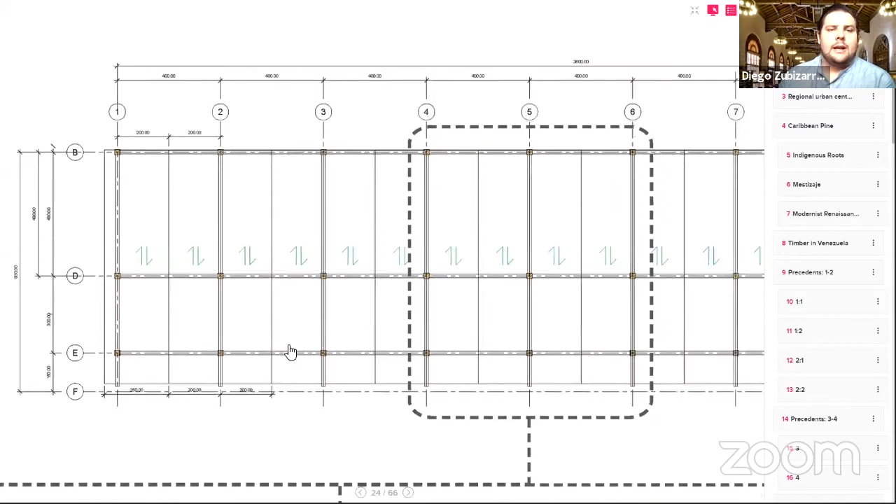The design evolved from the idea of pushing back the vertical structure and utilizing the potential of a two-way acting decking system, really facilitated by the primary beams running in one direction. The idea is recessing the vertical structure and allowing these balconies to create protection for the building, which factors into thinking of a frame that is built out but not necessarily immediately inhabited, but slowly developed and built to its end form.

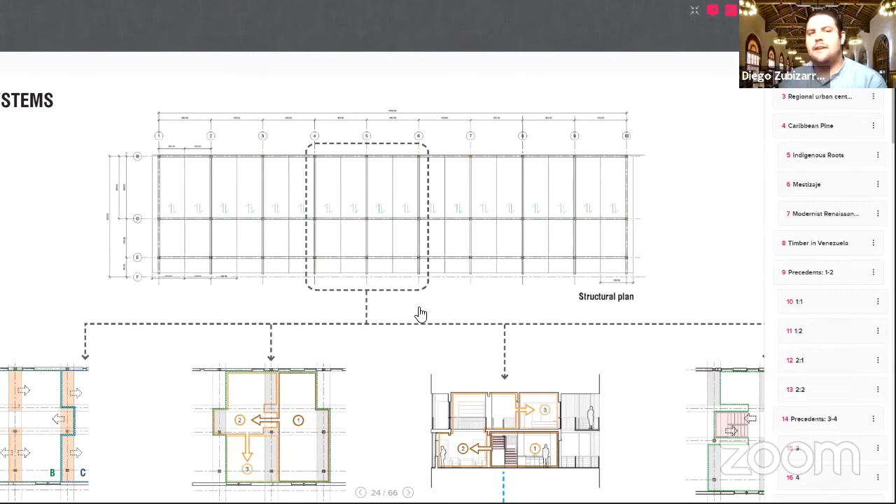That's a little bit of a loaded statement, but it will make sense as I get into it. Maybe not describing it in the best way, but these are some of the design logics that come after the plan. So this idea of these service bays that cluster around the structure and serve these main spaces.

The idea of this incremental growth of a unit, starting potentially with one space and then growing onto another. In the same way, vertically doing the idea of expansion horizontally and vertically within this framework. This is shown in plan here. This diagram really shows these ideas and how they translate into potential floor plans.

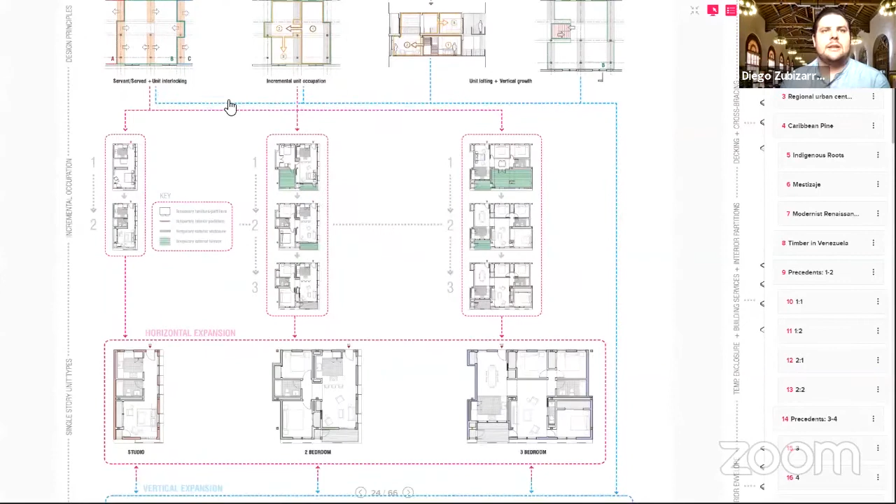So if I go to my next slide, you're starting out with your built-in systems, which are provided by, say, a contractor that builds up the frame and the floor system and a temporary enclosure. The building starts, certain elements of the building exist, and certain elements start to be temporarily inhabited by occupants and built out.

So here is highlighted in blue as a kind of temporary enclosure and temporary interior partitions in red, and then some of the spaces that might not be immediately occupied or finished, but eventually will be, in green. This is just one example of what that evolution might look like.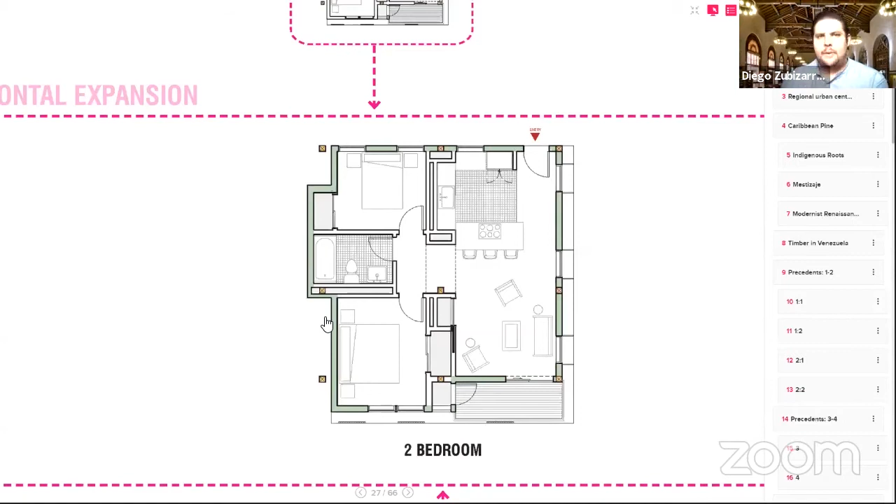In this diagram I'm looking at 3 bay conditions and how those could develop into units. So this, for instance, is a potential studio unit, which again has this idea of service bays that can interlock between units, centralizing those within bays that can extend vertically in the building, not necessarily having to cross against the primary beams to serve the unit.

So in a sense, once these cores are built in, they can then be utilized by the basically the idea, the potential floor plan that would give you a bathroom or kitchen, for instance.

Branching from the concept of vertical growth, the potential of these units to start to open up and loft, creating more dynamic vertical spaces within the units. The idea is the proposal develops this kind of spectrum of adaptability to different conditions and needs, and potentially contemplates just the

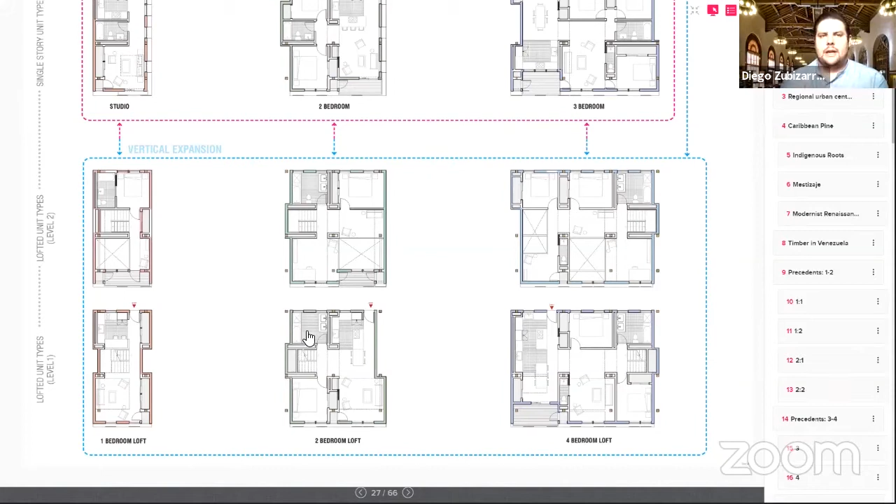coexistence or co-inhabiting of users with different socioeconomic needs, so that they would inhabit or build part of their units according to different means, if you will. So just finalizing this slide, looking at the constructive systems as this kind of matrix or spectrum of possibilities. I think I was just really excited to embrace the idea of a more low-tech approach to building with wood.

Understanding that in Venezuela there's really just a basically non-existent structural wood market. But thinking of this project as a potential catalyst that can start to build with wood and incrementally deal with both the visual acceptance of the material and explore alternative hybrid ways of building that are more low-tech or suited to local resources.

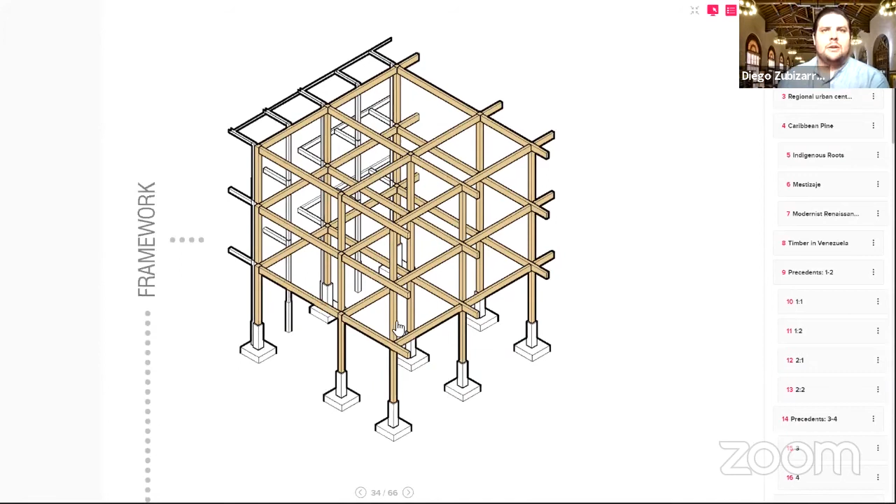Going back to the idea of this glulam frame, which is the base system, built out of Caribbean pine glulam, then transitioning onto the decking and cross bracing material, which potentially could be dimensional lumber for box floors built with solid decking, solid wood, utilizing more conventional cross bracing systems such as steel rod.

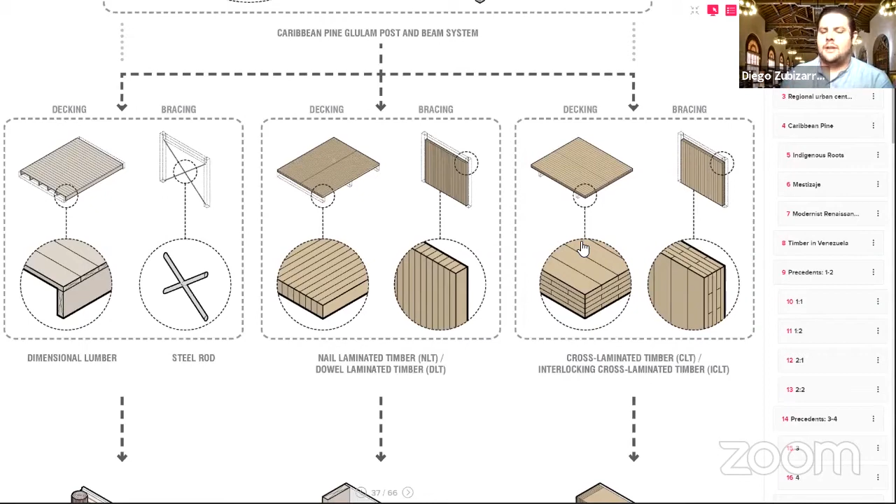Or going into systems such as NLT with OSB plating to shear, or potentially if you could develop a system like actually CLT or ICLT, if the productive or manufacturing capacities could develop in Venezuela, then utilizing those materials.

Looking at the service core here three-dimensionally, this idea of service areas that move or function vertically in the building and allow for flexibility in how you plug into them, and looking at interior partitions. Here is a look at some of the actual vernacular constructive techniques.

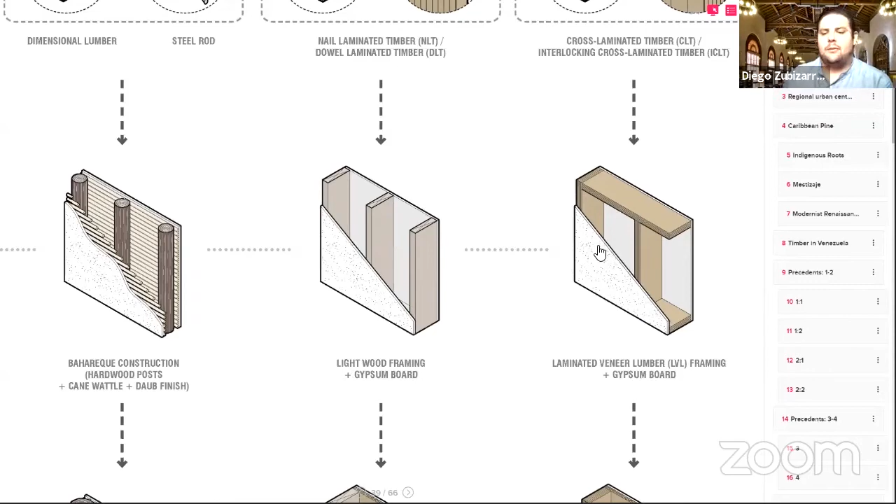It could be these bahareque construction walls, made with hardwood posts and cane wattle and daub used as partitions, or starting to embrace the idea of more lightwood framing, which is typically a more North American concept, and then even a more precise way of building partitions with LVL, which is maybe a more stable, more precise product.

And then exterior envelope, again looking at the potential at the lower spectrum of the more economically accessible, building with cane wattle and soil infill as insulator, and then moving into actual lightwood framing with batt insulation, or these more developed systems of engineered timber and exterior rigid insulation.

And then finally, things like the shading devices on the building, which it could embody. So this starts to get at the expression of a wood building also as an architectural device, not just this concealed element.

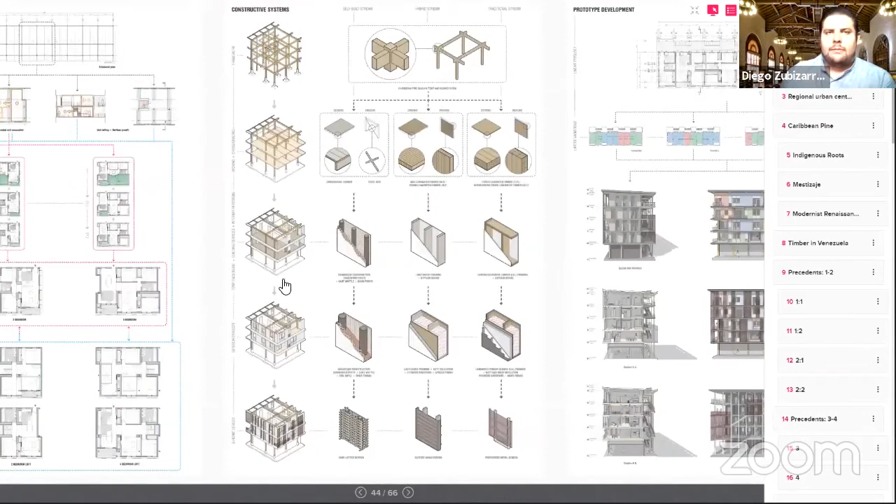So basically from there, started with developing a linear typology, looking at that at the architectural scale and working out some of the details of how it would work. So just looking at a typical floor plan.

So on one loaded scheme that could potentially have this kind of breezeway. Really, the project is focused on this more mid-rise scale. It seems more feasible as a starting point, probably like a 4 or 5 story unit height, as a parting point.

Looking at the potential of this, if you introduce this really flexible system that could incorporate, that could allow different units to happen, different arrangements. There's a certain architectural richness to that, and within that, maybe disarray, how architectural elements can start to regulate some of the expression of the building.

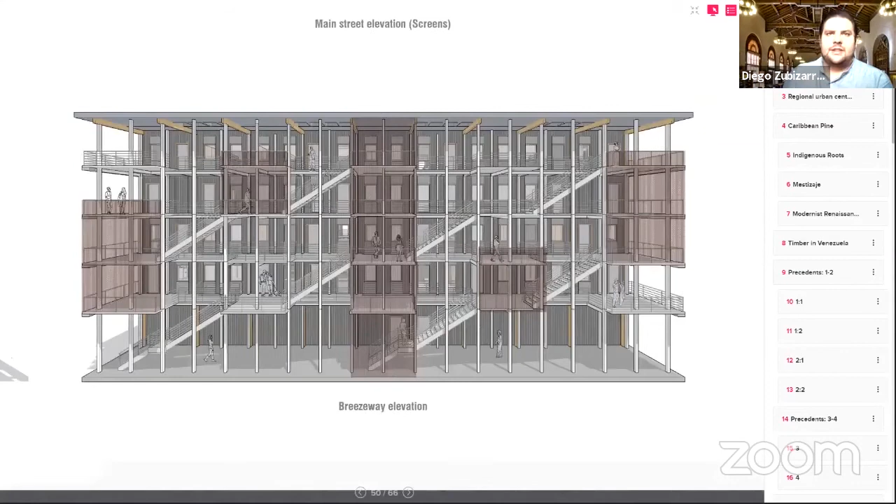And obviously a lot of these design decisions are also informed by the response to the climate and the solar exposure. Really generous overhangs on the southern exposure, based on precedent, looking at built work, and these shading devices being really critical to tropical architecture.

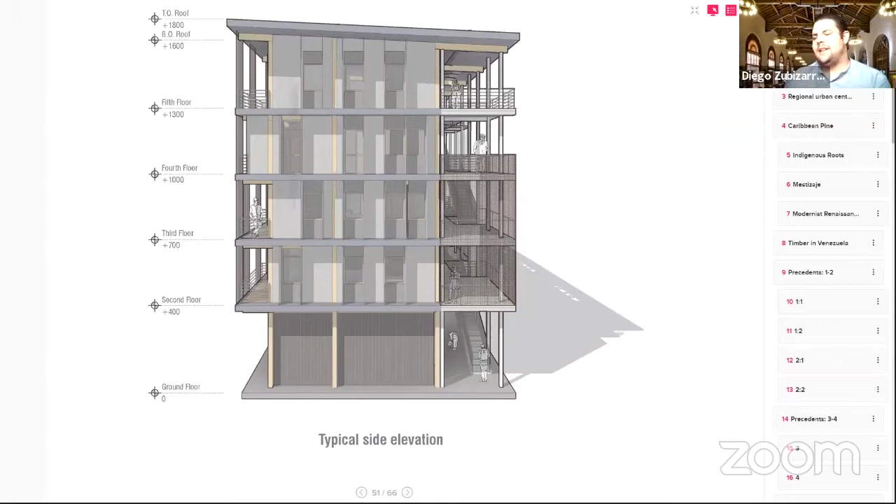And then looking at how these panels might fold in the maybe eastern and western portions of the building and start acting as vertical fins to block eastern and western light.

These are some sections, looking at how those systems might work sectionally, both in terms of the functional wet cores and how the line of the enclosure can play with different depth balconies and such.

And the idea of these social spaces in the breezeways as a social catalyst. Then, very diagrammatically or generically, leaving the ground floor as something that could potentially be just commercial space or building amenities. This section looks at the potential of this lofted type of unit, and how that could happen within a system that incorporates both one-story and lofted units.

And then finally, this is an overview of the constructive sequence at a larger site scale.

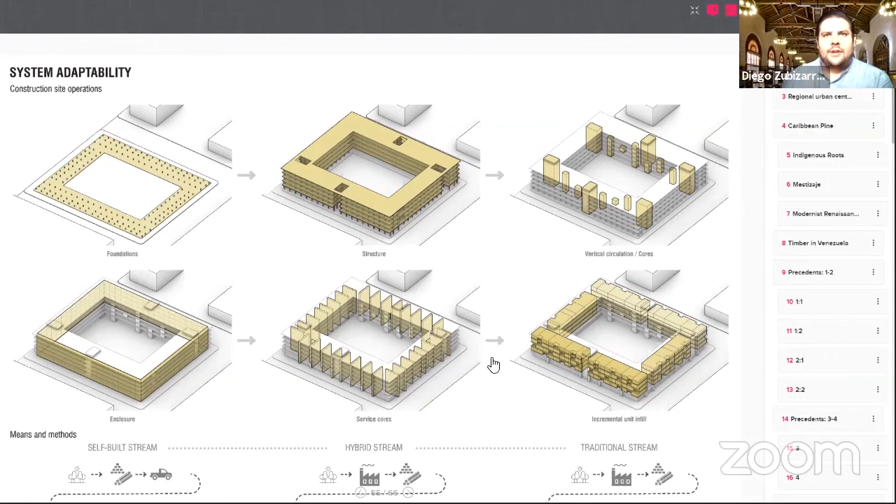Pretty self-evident, so I won't get into that, but basically these are just some diagrams here looking at those streams, which I've named self-built, hybrid, and traditional.

A more traditional system is based on the idea of manufacturing material, having it delivered to the site in a conventional way and installed through trained labor, leading to a generally higher quality type of building, perhaps more costly, arguably, but in less time.

But then, conceptually thinking about how some of that user empowerment can start to develop, something that takes longer over time, but as long as this initial framework is there, it can allow users to build onto these kinds of units and do so at a reduced cost.

So these are some zoom-ins of those diagrams, and this is kind of the intersection of this idea of user versus designer input.

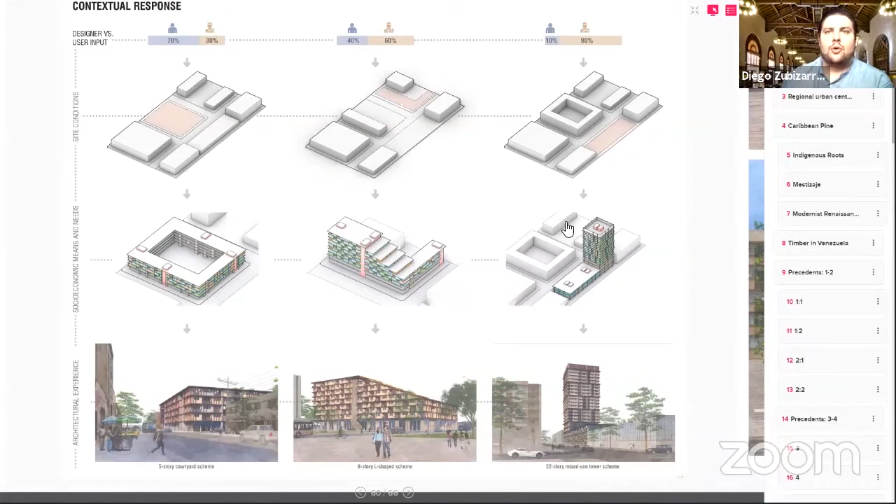I didn't really explore specific sites in Ciudad Guayana, but I just started imagining, in an urban context, if you have more of a rectangular square lot versus a corner versus a linear lot in a high density urban area, and how that might start to inform some of the scale and architectural expression of those prototypes.

So this is what might be the kind of more self-built architectural expression, which is a bit more of a mid-rise density or low-rise.

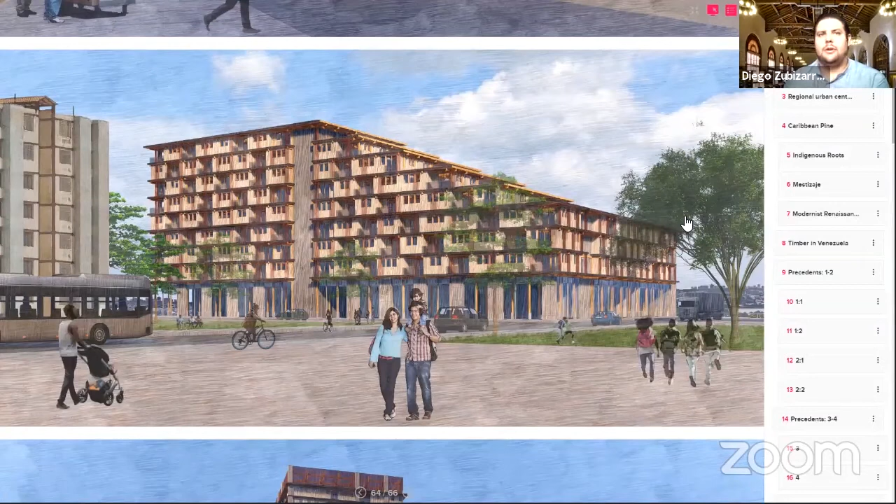And you can start to see here how some of the cladding materials that might potentially be self-built start to be also regulated by these more rigorous architectural elements that are in the control of the designer, and how this might adapt to maybe a more middle class kind of neighborhood, and start to take up a larger scale and have to have more of a sectional play with terracing perhaps.

And even just considering what a high-rise timber building might look like with this typology.

So that is the presentation, and I will open the floor to comments. I hope sometimes I get tangled up in some of the concepts, but hopefully they came across. I think what's been hard about this project is jumping in scales, and things don't align perfectly from one scale to the other. But the idea is that it's this precise incremental system that also gains complexity as you incorporate more factors. So that's sort of where I'm at.

Thank you, Diego. Let's make sure we give some time for feedback.

Diego, I have followed your work for a while, and I want to really commend you for coming up at the climax, the pinnacle of your education here, or your courses here. And I think your project is correct and really good on many aspects.

But I want to ask you to elaborate a little bit more on some conceptual issues that are present in your project, but I think you are letting them kind of escape through your narrative. Ciudad Guayana is a resource extraction city. It was a city that was designed and built to do resource extraction, not the oil of the coast, but the mining and the pine of that region.

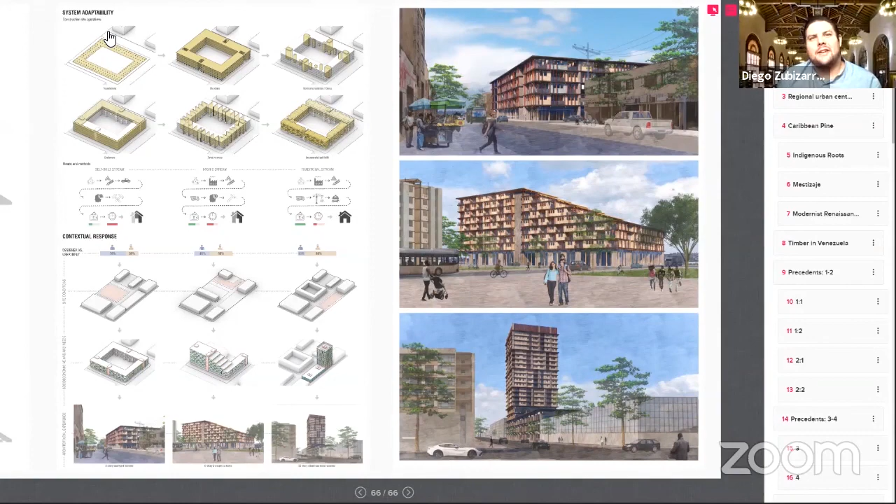Thank you. This is really great feedback. I think these are all great comments. I'm going to stop the screen share for a minute.

Diego, thank you so much for the work this semester, and the comments. I think the comments were all spot on, and they highlight the breadth and complexity of what you're looking at. But I really appreciate your enthusiasm, and we've talked a lot. I think Ellen is talking about the temporal character and how we can convey that visually. We've talked about a lot of these things, right? And so, just like Jake, in the end you're just a one-man show, trying to do it all. So it's an incredible accomplishment. Based on the enthusiasm you've exhibited over the last two years here, I don't have any doubts that you'll carry that onward in your professional career.